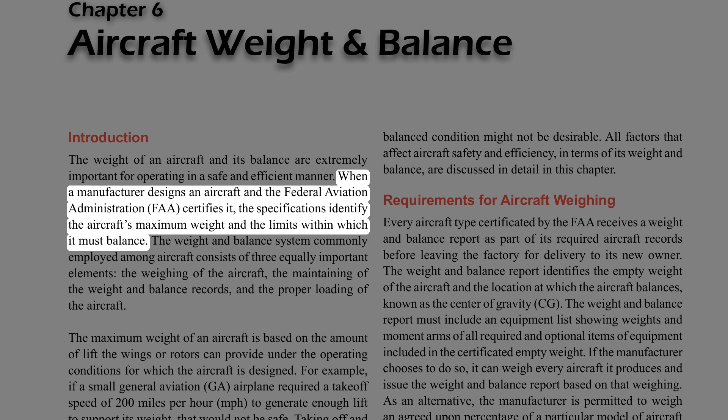The weight and balance system commonly employed among aircraft consists of three equally important elements: the weighing of the aircraft, the maintaining of the weight and balance records, and the proper loading of the aircraft.

The maximum weight of an aircraft is based on the amount of lift the wings or rotors can provide under the operating conditions for which the aircraft is designed. For example, if a small general aviation airplane required a takeoff speed of 200 mph to generate enough lift to support its weight, that would not be safe. Taking off and landing at lower airspeeds is certainly safer than doing so at higher speeds.

Aircraft balance is also a significant factor in determining if the aircraft is safe to operate. An aircraft that does not have good balance can exhibit poor maneuverability and controllability, making it difficult or impossible to fly. This could result in an accident, causing damage to the aircraft and injury to the people on board. Safety is the primary reason for concern about an aircraft's weight and balance.

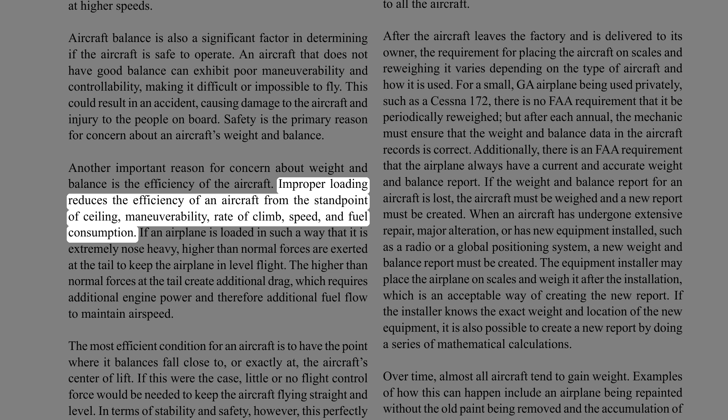Another important reason for concern about weight and balance is the efficiency of the aircraft. Improper loading reduces the efficiency of an aircraft from the standpoint of ceiling, maneuverability, rate of climb, speed, and fuel consumption. If an airplane is loaded in such a way that it is extremely nose-heavy, higher than normal forces are exerted at the tail to keep the airplane in level flight.

The higher than normal forces at the tail create additional drag, which requires additional engine power and therefore additional fuel flow to maintain airspeed. The most efficient condition for an aircraft is to have the point where it balances fall close to, or exactly at, the aircraft's center of lift.

If this were the case, little or no flight control force would be needed to keep the aircraft flying straight and level. In terms of stability and safety, however, this perfectly balanced condition might not be desirable.

All factors that affect aircraft safety and efficiency, in terms of its weight and balance, are discussed in detail in this chapter. Requirements for aircraft weighing.

Every aircraft type certificated by the FAA receives a weight and balance report as part of its required aircraft records before leaving the factory for delivery to its new owner. The weight and balance report identifies the empty weight of the aircraft and the location at which the aircraft balances, known as the center of gravity (CG).

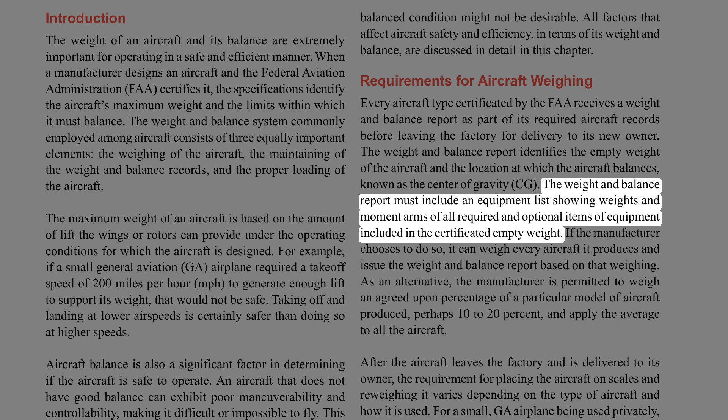The weight and balance report must include an equipment list showing weights and moment arms of all required and optional items of equipment included in the certificated empty weight.

If the manufacturer chooses to do so, it can weigh every aircraft it produces and issue the weight and balance report based on that weighing. As an alternative, the manufacturer is permitted to weigh an agreed-upon percentage of a particular model of aircraft produced, perhaps 10 to 20%, and apply the average to all the aircraft.

After the aircraft leaves the factory and is delivered to its owner, the requirement for placing the aircraft on scales and reweighing it varies depending on the type of aircraft and how it is used.

For a small, GA airplane being used privately, such as a Cessna 172, there is no FAA requirement that it be periodically reweighed. But after each annual, the mechanic must ensure that the weight and balance data in the aircraft records is correct. Additionally, there is an FAA requirement that the airplane always have a current and accurate weight and balance report.

If the weight and balance report for an aircraft is lost, the aircraft must be weighed and a new report must be created.

When an aircraft has undergone extensive repair, major alteration, or has new equipment installed, such as a radio or a global positioning system, a new weight and balance report must be created.

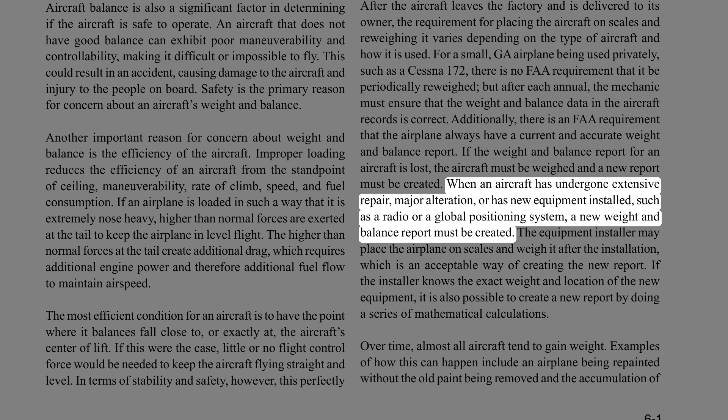The equipment installer may place the airplane on scales and weigh it after the installation, which is an acceptable way of creating the new report.

If the installer knows the exact weight and location of the new equipment, it is also possible to create a new report by doing a series of mathematical calculations.

Over time, almost all aircraft tend to gain weight. Examples of how this can happen include an airplane being repainted without the old paint being removed, and the accumulation of dirt, grease, and oil in parts of the aircraft that are not easily accessible for cleaning.

When new equipment is installed, and its weight and location are mathematically accounted for, some miscellaneous weight might be overlooked, such as wire and hardware. For this reason, even if the FAA does not require it, it is a good practice to periodically place an aircraft on scales and confirm its actual empty weight and empty weight center of gravity, EWCG.

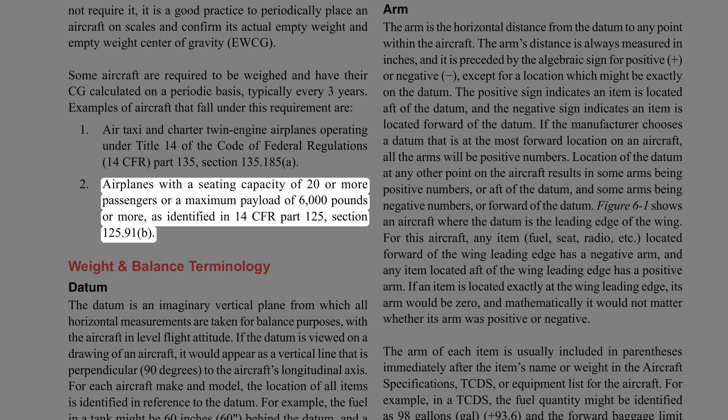Some aircraft are required to be weighed and have their CG calculated on a periodic basis, typically every 3 years. Examples include air taxi and charter twin-engine airplanes operating under Title 14 of the Code of Federal Regulations, 14 CFR, Part 135, Section 135.185(A), airplanes with a seating capacity of 20 or more passengers or a maximum payload of 6,000 pounds or more, as identified in 14 CFR Part 125, Section 125.91(B).

Weight and balance terminology: Datum. The datum is an imaginary vertical plane from which all horizontal measurements are taken for balance purposes, with the aircraft in level flight attitude. If the datum is viewed on a drawing of an aircraft, it would appear as a vertical line that is perpendicular, 90 degrees, to the aircraft's longitudinal axis.

For each aircraft make and model, the location of all items is identified in reference to the datum. For example, the fuel in a tank might be 60 inches behind the datum, and a radio on the flight deck might be 90 inches forward of the datum. The datum is determined by the manufacturer.

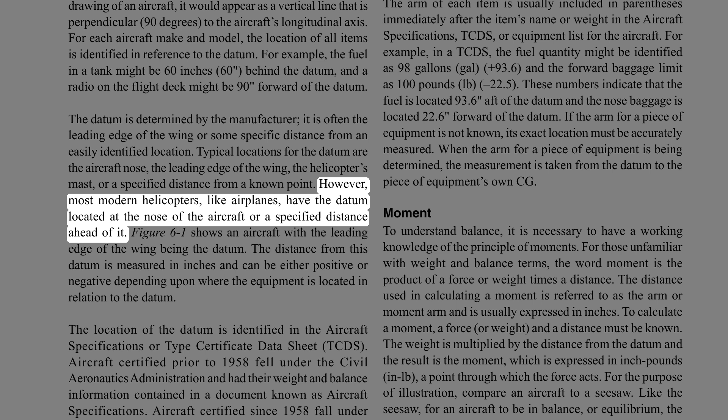It is often the leading edge of the wing or some specific distance from an easily identified location. Typical locations for the datum are the aircraft nose, the leading edge of the wing, the helicopter's mast, or a specified distance from a known point. However, most modern helicopters, like airplanes, have the datum located at the nose of the aircraft or a specified distance ahead of it. Figure 6-1 shows an aircraft with the leading edge of the wing being the datum.

The distance from this datum is measured in inches and can be either positive or negative depending upon where the equipment is located in relation to the datum. The location of the datum is identified in the aircraft specifications or type certificate data sheet, TCDS.

Aircraft certified prior to 1958 fell under the Civil Aeronautics Administration and had their weight and balance information contained in a document known as aircraft specifications. Aircraft certified since 1958 fall under the FAA and have their weight and balance information contained in a document known as a Type Certificate Data Sheet, TCDS. The aircraft specifications typically included the aircraft equipment list. For aircraft with a TCDS, the equipment list is a separate document.

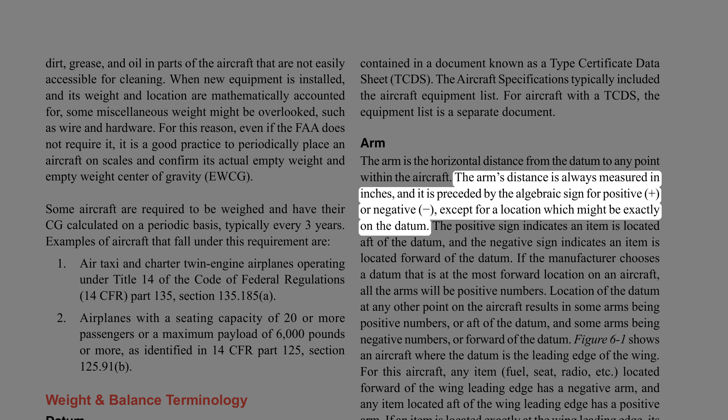ARM. The ARM is the horizontal distance from the datum to any point within the aircraft. The ARM's distance is always measured in inches, and it is preceded by the algebraic sign for positive, plus, or negative, minus, except for a location which might be exactly on the datum. The positive sign indicates an item is located aft of the datum, and the negative sign indicates an item is located forward of the datum.

If the manufacturer chooses a datum that is at the most forward location on an aircraft, all the arms will be positive numbers. Location of the datum at any other point on the aircraft results in some arms being positive numbers, or aft of the datum, and some arms being negative numbers, or forward of the datum.

Figure 6-1 shows an aircraft where the datum is the leading edge of the wing. For this aircraft, any item, fuel, seat, radio, etc., located forward of the wing leading edge has a negative arm, and any item located aft of the wing leading edge has a positive arm. If an item is located exactly at the wing leading edge, its arm would be 0, and mathematically it would not matter whether its arm was positive or negative.

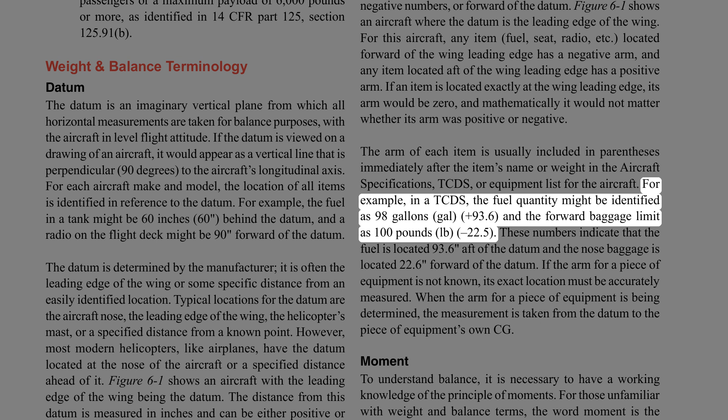The arm of each item is usually included in parentheses immediately after the item's name or weight in the aircraft specifications, TCDS, or equipment list for the aircraft. For example, in a TCDS, the fuel quantity might be identified as 98 gallons plus 93.6, and the forward baggage limit as 100 pounds minus 22.5. These numbers indicate that the fuel is located 93.6 aft of the datum and the nose baggage is located 22.6 forward of the datum. If the arm for a piece of equipment is not known, its exact location must be accurately measured.

When the arm for a piece of equipment is being determined, the measurement is taken from the datum to the piece of equipment's own CG.

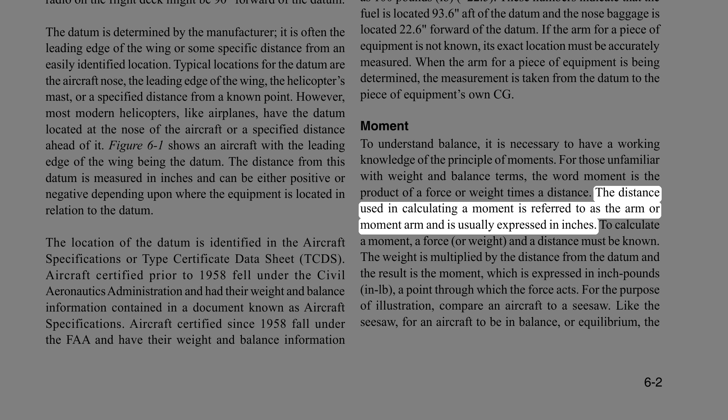Moment. To understand balance, it is necessary to have a working knowledge of the principle of moments. The word moment is the product of a force or weight times a distance. The distance used in calculating a moment is referred to as the arm or moment arm and is usually expressed in inches. To calculate a moment, a force or weight, and a distance must be known. The weight is multiplied by the distance from the datum and the result is the moment, which is expressed in inch-pounds, in lb, a point through which the force acts.

For the purpose of illustration, compare an aircraft to a seesaw. Like the seesaw, for an aircraft to be in balance or equilibrium, the sum of the moments on each side of the balance point must be equal.

The same weight at different distances, in inches, from the datum have greater moments. A 5 pound radio located 80 inches from the datum would have a moment of 400 in lb, 5 pounds times 80 inches. A 10-pound radio located 12 inches from the datum would have a moment of 120 in lb.

Whether the moment is preceded by a positive, plus, or negative, minus, sign depends on its location in relation to the datum. Figure 6-2 shows where the moment ends up being a positive number because the weight and arm are both positive. The algebraic sign of the moment, based on the datum location and whether weight is being installed or removed, would be as follows.

Weight being added aft of the datum produces a positive moment, plus weight, plus arm. Weight being added forward of the datum produces a negative moment, plus weight, minus arm. Weight being removed aft of the datum produces a negative moment, minus weight, plus arm. Weight being removed forward of the datum produces a positive moment, minus weight, minus arm.

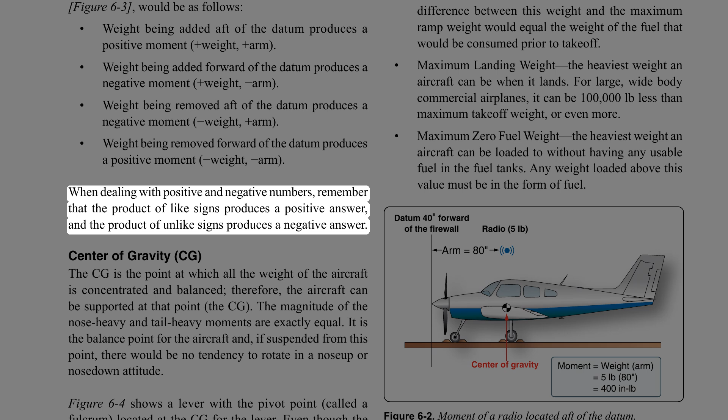When dealing with positive and negative numbers, remember that the product of like signs produces a positive answer, and the product of unlike signs produces a negative answer.

Center of gravity, CG. The CG is the point at which all the weight of the aircraft is concentrated and balanced. Therefore, the aircraft can be supported at that point, the CG. The magnitude of the nose-heavy and tail-heavy moments are exactly equal.

It is the balance point for the aircraft and, if suspended from this point, there would be no tendency to rotate in a nose-up or nose-down attitude.

Figure 6-4 shows a lever with the pivot point, called a fulcrum, located at the CG for the lever. Even though the weights on either side of the fulcrum are not equal, and the distances from each weight to the fulcrum are not equal, the product of the weights and arms, moments, are equal, and that is what produces a balanced condition. Therefore, the lever would be balanced much like two persons sitting on a seesaw who are differing weights and located at different distances from the fulcrum.

Maximum weight. The maximum weight is the maximum authorized weight of the aircraft and its contents, and is indicated in the aircraft specifications or TCDS.

For many aircraft, there are variations to the maximum allowable weight depending on the purpose and conditions under which the aircraft is to be flown. For example, a certain aircraft may be allowed a maximum gross weight of 2,750 pounds when flown in the normal category, but when flown in the utility category, which allows for limited aerobatics, the same aircraft's maximum allowable gross weight might only be 2,175 lb.

There are other variations when dealing with the concept of maximum weight, as follows. Maximum ramp weight, the heaviest weight to which an aircraft can be loaded while it is sitting on the ground. This is sometimes referred to as the maximum taxi weight.

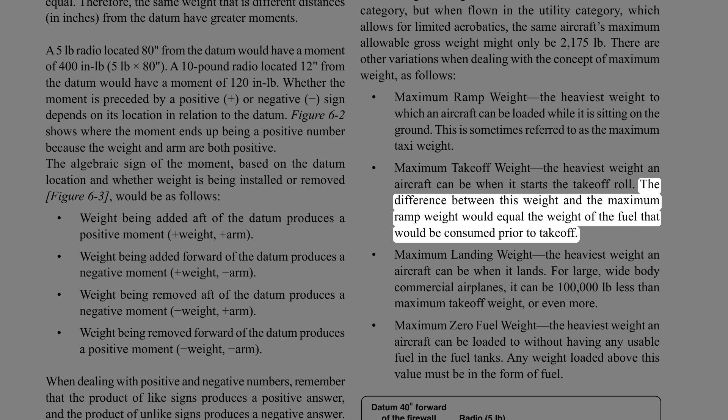Maximum takeoff weight, the heaviest weight an aircraft can be when it starts the takeoff roll. The difference between this weight and the maximum ramp weight would equal the weight of the fuel that would be consumed prior to takeoff. Maximum landing weight, the heaviest weight an aircraft can be when it lands.

For large, wide-body commercial airplanes, it can be 100,000 pounds less than maximum takeoff weight, or even more. Maximum zero fuel weight, the heaviest weight an aircraft can be loaded to without having any usable fuel in the fuel tanks. Any weight loaded above this value must be in the form of fuel.

Empty weight. The empty weight of an aircraft includes all operating equipment that has a fixed location and is actually installed in the aircraft.

It includes the weight of the airframe, power plant, required equipment, optional or special equipment, fixed ballast, hydraulic fluid, and residual fuel and oil. Residual fuel and oil are the fluids that do not normally drain out because they are trapped in the fuel lines, oil lines, and tanks. They must be included in the aircraft's empty weight.

For most aircraft certified after 1978, the full capacity of the engine oil system is also included in the empty weight. Information regarding residual fluids in aircraft systems that must be included in the empty weight, and whether or not full oil is included, will be indicated in the aircraft specifications or TCDS.

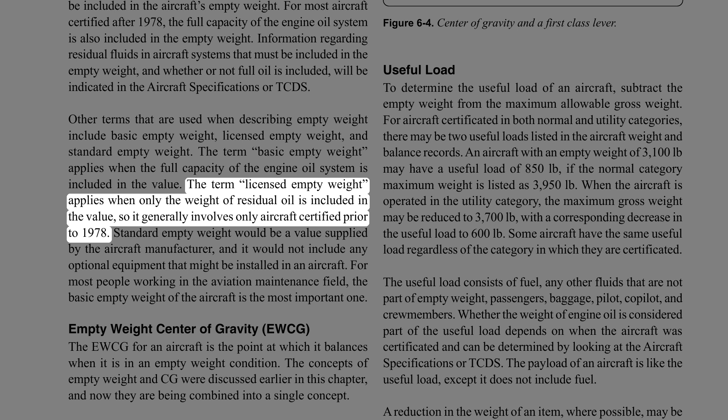Other terms that are used when describing empty weight include basic empty weight, licensed empty weight, and standard empty weight. The term basic empty weight applies when the full capacity of the engine oil system is included in the value. The term licensed empty weight applies when only the weight of residual oil is included in the value, so it generally involves only aircraft certified prior to 1978.

Standard empty weight would be a value supplied by the aircraft manufacturer, and it would not include any optional equipment that might be installed in an aircraft. For most people working in the aviation maintenance field, the basic empty weight of the aircraft is the most important one. Empty weight center of gravity, EWCG.

The EWCG for an aircraft is the point at which it balances when it is in an empty weight condition. The concepts of empty weight and CG were discussed earlier in this chapter, and now they are being combined into a single concept.

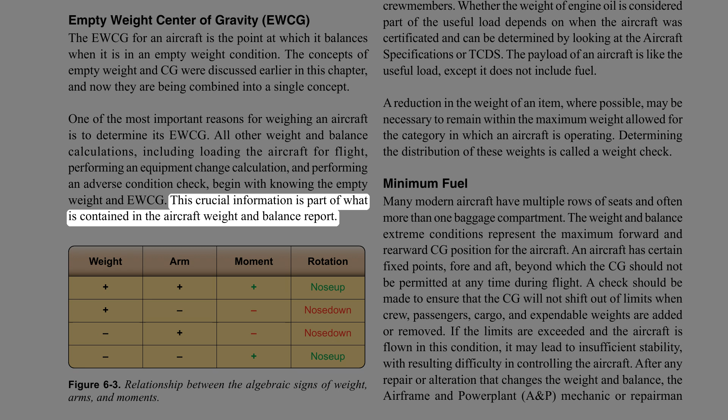One of the most important reasons for weighing an aircraft is to determine its EWCG. All other weight and balance calculations, including loading the aircraft for flight, performing an equipment change calculation, and performing an adverse condition check, begin with knowing the empty weight and EWCG. This crucial information is part of what is contained in the aircraft weight and balance report.

Useful load. To determine the useful load of an aircraft, subtract the empty weight from the maximum allowable gross weight. For aircraft certificated in both normal and utility categories, there may be two useful loads listed in the aircraft weight and balance records. An aircraft with an empty weight of 3,100 pounds may have a useful load of 850 pounds, if the normal category maximum weight is listed as 3,950 lb.

When the aircraft is operated in the utility category, the maximum gross weight may be reduced to 3,700 pounds, with a corresponding decrease in the useful load to 600 lb. Some aircraft have the same useful load regardless of the category in which they are certificated.

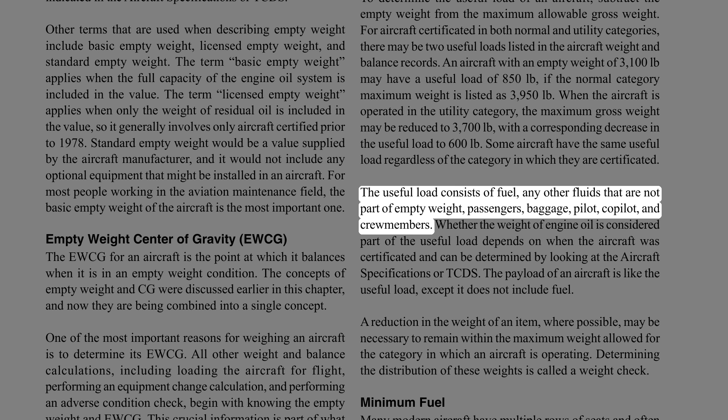The useful load consists of fuel, any other fluids that are not part of empty weight, passengers, baggage, pilot, co-pilot, and crew members. Whether the weight of engine oil is considered part of the useful load depends on when the aircraft was certificated and can be determined by looking at the aircraft specifications or TCDS.

The payload of an aircraft is like the useful load, except it does not include fuel. A reduction in the weight of an item, where possible, may be necessary to remain within the maximum weight allowed for the category in which an aircraft is operating. Determining the distribution of these weights is called a weight check.

Minimum fuel. Many modern aircraft have multiple rows of seats and often more than one baggage compartment. The weight and balance extreme conditions represent the maximum forward and rearward CG position for the aircraft. An aircraft has certain fixed points, fore and aft, beyond which the CG should not be permitted at any time during flight.

A check should be made to ensure that the CG will not shift out of limits when crew, passengers, cargo, and expendable weights are added or removed. If the limits are exceeded and the aircraft is flown in this condition, it may lead to insufficient stability, with resulting difficulty in controlling the aircraft.

After any repair or alteration that changes the weight and balance, the airframe and power plant, A&P, mechanic or repairman, must ensure that no legal condition of loading can move the CG outside of its allowable limits. To determine this, the mechanic will deliberately attempt to calculate the aircraft loading in such a manner as to place the CG outside the limits of the aircraft.

This is called an adverse loading check. For example, in a forward adverse loaded CG check, all useful load in front of the forward CG limit is loaded, and all useful load behind this limit is left empty. An exception to leaving it empty is the fuel tank.

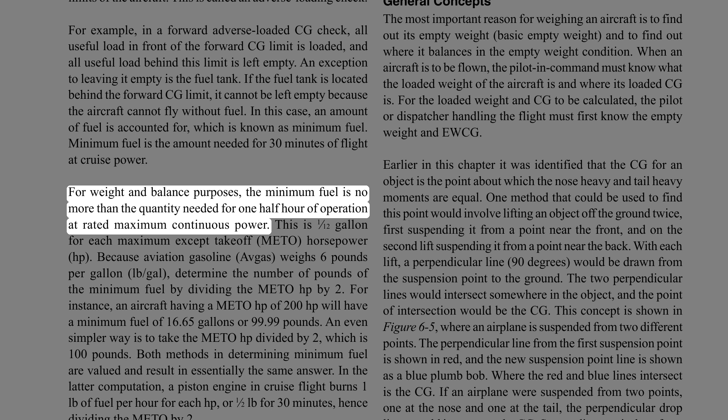Minimum fuel is the amount needed for 30 minutes of flight at cruise power. For weight and balance purposes, the minimum fuel is no more than the quantity needed for 1/2 hour of operation at rated maximum continuous power. This is 1/12 gallon for each maximum except takeoff, METO, horsepower, HP.

Because aviation gasoline, avgas, weighs 6 pounds per gallon, determine the number of pounds of the minimum fuel by dividing the METO HP by 2. For instance, an aircraft having a METO HP of 200 horsepower will have a minimum fuel of 16.65 gallons, or 99.99 pounds. An even simpler way is to take the METO HP divided by 2, which is 100 pounds.

Both methods in determining minimum fuel are valid and result in essentially the same answer. In the latter computation, a piston engine in cruise flight burns 1 pound of fuel per hour for each HP, or half a pound for 30 minutes, hence dividing the METO by 2.

For example, if a forward adverse loaded CG check was performed on a piston engine aircraft, with the engine having a METO HP of 200, the minimum fuel would be 100 pounds, 200 METO HP divided by 2.

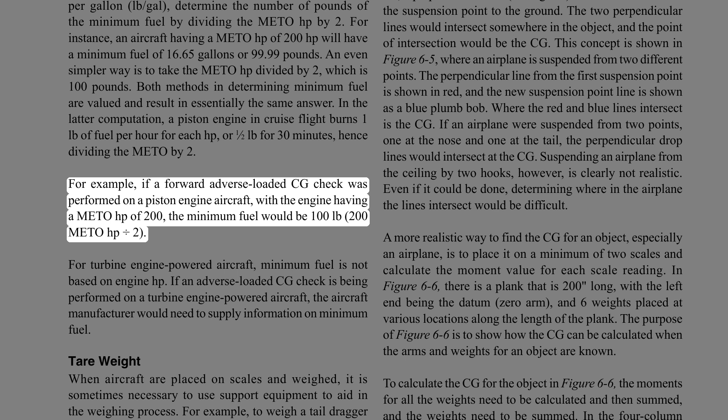For turbine engine powered aircraft, minimum fuel is not based on engine HP. If an adverse loaded CG check is being performed on a turbine engine powered aircraft, the aircraft manufacturer would need to supply information on minimum fuel.

Tare weight: when aircraft are placed on scales and weighed, it is sometimes necessary to use support equipment to aid in the weighing process. For example, to weigh a tail dragger airplane, it is necessary to raise the tail to get the airplane level. To level the airplane, a jack might be placed on the scale and used to raise the tail. Unfortunately, the scale is now absorbing the weight of the jack in addition to the weight of the airplane. This extra weight is known as tare weight and must be subtracted from the scale reading.

Other examples of tare weight are wheel chocks placed on the scales and ground locks left in place on retractable landing gear. Procedures for weighing an aircraft.

General concepts: the most important reason for weighing an aircraft is to find out its empty weight, basic empty weight, and to find out where it balances in the empty weight condition. When an aircraft is to be flown, the pilot in command must know what the loaded weight of the aircraft is and where its loaded CG is.

For the loaded weight and CG to be calculated, the pilot or dispatcher handling the flight must first know the empty weight and EWCG. Earlier in this chapter it was identified that the CG for an object is the point about which the nose-heavy and tail-heavy moments are equal.

One method that could be used to find this point would involve lifting an object off the ground twice, first suspending it from a point near the front, and on the second lift suspending it from a point near the back. With each lift, a perpendicular line, 90 degrees, would be drawn from the suspension point to the ground. The two perpendicular lines would intersect somewhere in the object, and the point of intersection would be the CG.

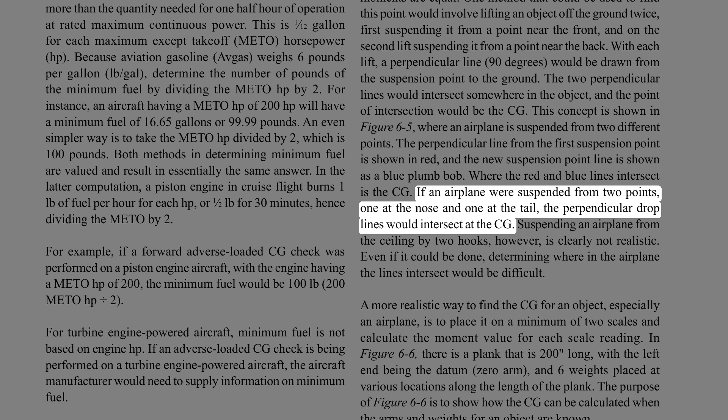This concept is shown in Figure 6-5, where an airplane is suspended from two different points. The perpendicular line from the first suspension point is shown in red, and the new suspension point line is shown as a blue plumb bob. Where the red and blue lines intersect is the CG. If an airplane were suspended from 2 points, one at the nose and one at the tail, the perpendicular drop lines would intersect at the CG.

Suspending an airplane from the ceiling by 2 hooks, however, is clearly not realistic. Even if it could be done, determining where in the airplane the lines intersect would be difficult. A more realistic way to find the CG for an object, especially an airplane, is to place it on a minimum of 2 scales and calculate the moment value for each scale reading.

In Figure 6-6, there is a plank that is 200 inches long, with the left end being the datum, 0 arm, and 6 weights placed at various locations along the length of the plank. The purpose of Figure 6-6 is to show how the CG can be calculated when the arms and weights for an object are known.

To calculate the CG for the object in Figure 6-6, the moments for all the weights need to be calculated and then summed, and the weights need to be summed. In the 4-column table in Figure 6-7, the item, weight, and arm are listed in the first 3 columns, with the information coming from Figure 6-6.

The moment value in the 4th column is the product of the weight and arm. The weight and moment columns are summed, with the CG being equal to the total moment divided by the total weight. The arm column is not summed. The number appearing at the bottom of that column is the CG.

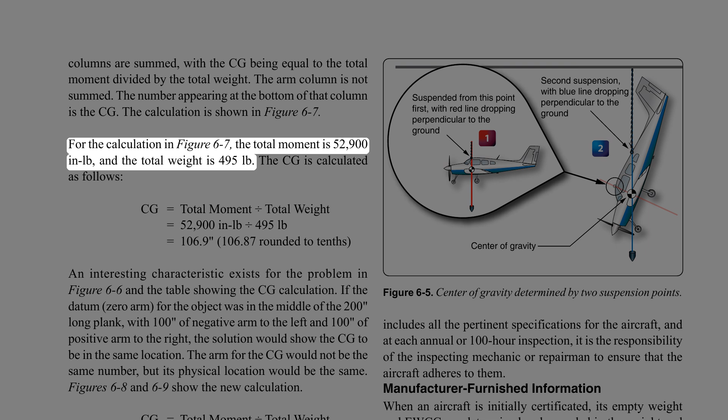The calculation is shown in Figure 6-7. For the calculation in Figure 6-7, the total moment is 52,900 in-lb, and the total weight is 495 lb. The CG is calculated as follows: CG equals total moment divided by total weight equals 52,900 in-lb divided by 495 pounds equals 106.9 inches, 106.87 rounded to tenths.

An interesting characteristic exists for the problem in Figure 6-6 in the table showing the CG calculation. If the datum, 0 arm, for the object was in the middle of the 200 inches long plank, with 100 inches of negative arm to the left and 100 inches of positive arm to the right, the solution would show the CG to be in the same location. The arm for the CG would not be the same number, but its physical location would be the same.

Figures 6-8 and 6-9 show the new calculation. CG equals total moment divided by total weight equals 3,400 in-lb divided by 495 pounds equals 6.9 inches, 6.87 rounded to tenths. In Figure 6-8, the CG is 6.9, to the right of the plank's center.

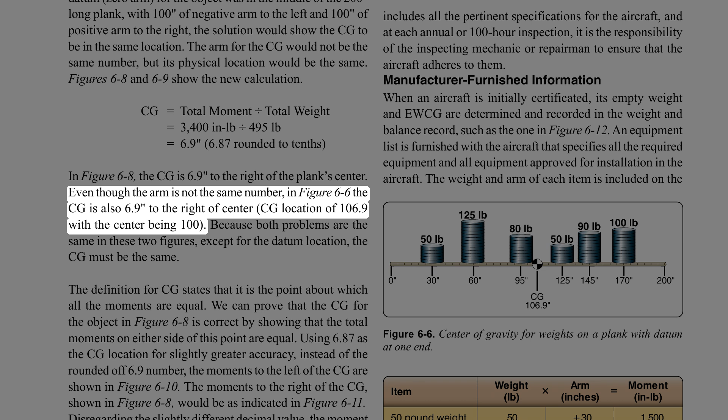Even though the arm is not the same number, in Figure 6-6 the CG is also 6.9, to the right of center, CG location of 106.9 with the center being 100. Because both problems are the same in these two figures, except for the datum location, the CG must be the same. The definition for CG states that it is the point about which all the moments are equal.

We can prove that the CG for the object in Figure 6-8 is correct by showing that the total moments on either side of this point are equal. Using 6.87 as the CG location for slightly greater accuracy, instead of the rounded off 6.9 number, the moments to the left of the CG are shown in Figure 6-10. The moments to the right of the CG, shown in Figure 6-8, would be as indicated in Figure 6-11. Disregarding the slightly different decimal value, the moment in both previous calculations is 10,651 in-lb.

Showing that the moments are equal is a good way of proving that the CG has been properly calculated.

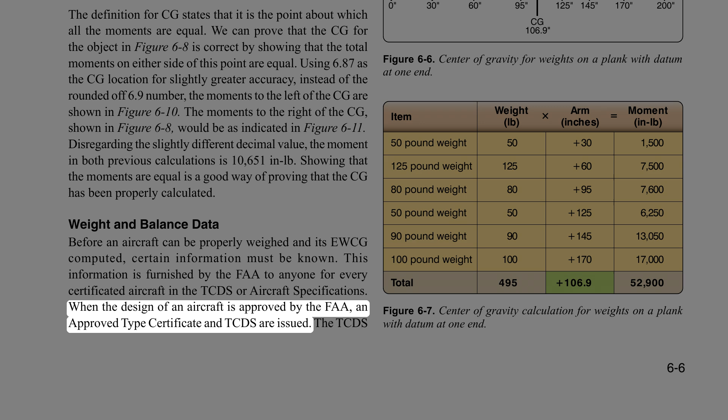Weight and balance data. Before an aircraft can be properly weighed and its EWCG computed, certain information must be known. This information is furnished by the FAA to anyone for every certificated aircraft in the TCDS, or aircraft specifications. When the design of an aircraft is approved by the FAA, an approved type certificate and TCDS are issued. The TCDS includes all the pertinent specifications for the aircraft, and at each annual or 100-hour inspection, it is the responsibility of the inspecting mechanic or repairman to ensure that the aircraft adheres to them.

Manufacturer-Furnished Information. When an aircraft is initially certificated, its empty weight and EWCG are determined and recorded in the weight and balance record, such as the one in Figure 6-12. An equipment list is furnished with the aircraft that specifies all the required equipment and all equipment approved for installation in the aircraft. The weight and arm of each item is included on the list, and all equipment installed when the aircraft left the factory is checked.

When an aircraft mechanic or repairman adds or removes any item on the equipment list, they must change the weight and balance record to indicate the new empty weight and EWCG, and the equipment list is revised to show what is installed. Figure 6-13 is an excerpt from a comprehensive equipment list that includes all the items of equipment approved for this model of aircraft.

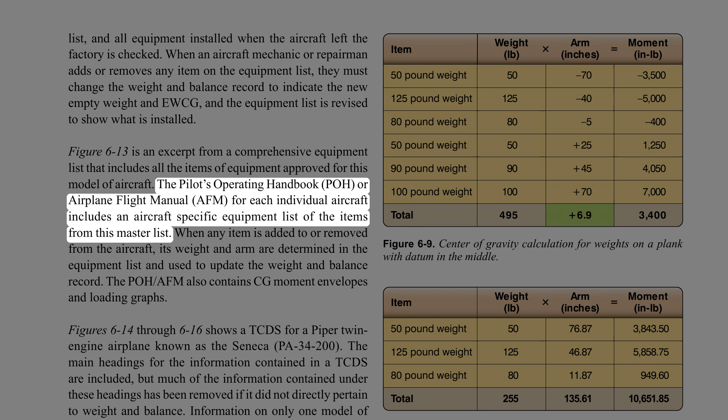The Pilot's Operating Handbook, POH, or Airplane Flight Manual, AFM, for each individual aircraft includes an aircraft-specific equipment list of the items from this master list. When any item is added to or removed from the aircraft, its weight and arm are determined in the equipment list and used to update the weight and balance record.

The POH/AFM also contains CG moment envelopes and loading graphs. Figures 6 to 14 through 6 to 16 show a TCDS for a Piper twin-engine airplane known as the Seneca.

PA-34-200. The main headings for the information contained in a TCDS are included, but much of the information under these headings has been removed if it did not directly pertain to weight and balance. Information on only one model of Seneca is shown, because showing all the different models would make the document excessively long. The portion of the TCDS that has the most direct application to weight and balance is highlighted in yellow.

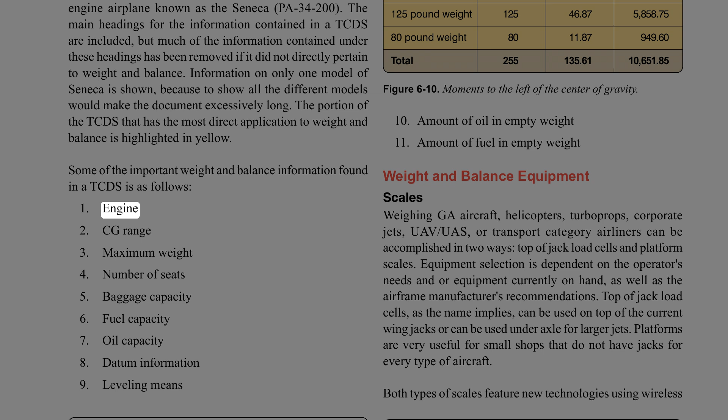Amount of oil in empty weight, amount of fuel in empty weight, weight and balance equipment, scales, weighing GA aircraft.

Helicopters, turboprops, corporate jets, UAV, UAS, or transport category airliners can be weighed in two ways: top of jack load cells and platform scales. Equipment selection depends on the operator's needs and/or equipment currently on hand, as well as the airframe manufacturer's recommendations. Top of jack load cells, as the name implies, can be used on top of the current wing jacks or under the axle for larger jets.

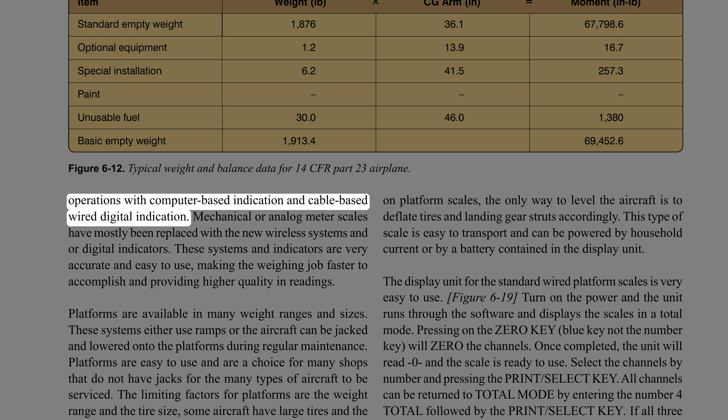Platforms are very useful for small shops that do not have jacks for every type of aircraft. Both types of scales feature new technologies using wireless operations with computer-based indication and cable-based wired digital indication. Mechanical or analog meter scales have mostly been replaced with new wireless systems and/or digital indicators.

These systems and indicators are very accurate and easy to use, making the weighing job faster to accomplish and providing higher quality readings. Platforms are available in many weight ranges and sizes. These systems either use ramps or the aircraft can be jacked and lowered onto the platforms during regular maintenance.

Platforms are easy to use and are a choice for many shops that do not have jacks for the many types of aircraft to be serviced. The limiting factors for platforms are the weight range and the tire size. Some aircraft have large tires and the platform may be too small for the specific aircraft tire. It is important to always use the right size scale and platform for the aircraft type and weighing job required.

The platform scale sits on the hangar floor in a level condition. Ramps and a tug are used to position the airplane tire on top of the platform and centered. Built into the platform is an electronic load cell that senses the weight being applied to it, which generates a corresponding electrical signal. Inside the load cell is an electronic strain gauge that measures a proportional change in electrical resistance as the weight applied to it increases.

An electrical cable or wireless signal runs from the platform scale to a display unit, computer, or tablet, which interprets the resistance change of the load cell and equates it to a specific number of pounds. A digital readout on the display shows the weight.

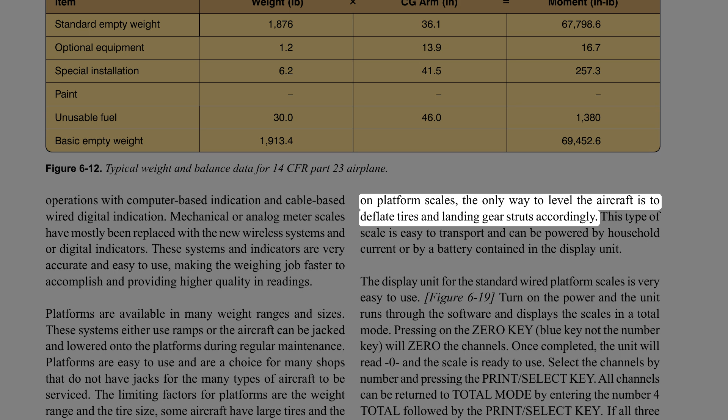If an aircraft is weighed on platform scales, the only way to level the aircraft is to deflate tires and landing gear struts accordingly. This type of scale is easy to transport and can be powered by household current or by a battery contained in the display unit.

The display unit for the standard wired platform scales is very easy to use. Turn on the power and the unit runs through the software and displays the scales in total mode. Pressing the ZERO key, the blue key not the number key, will zero the channels. Once completed, the unit will read zero and the scale is ready to use.

Select the channels by number and press the Print/Select key. All channels can be returned to total mode by entering the number 4 for total, followed by the Print/Select key. If all 3 scale switches are turned on at the same time, the total weight of the airplane is displayed.

The second type of aircraft scale is a top-of-jack, cell-based scale, where each jack point receives a cell-based transducer on top of the jack. It is very easy to use and level the aircraft during the weighing operation.

The system is easy to transport, lightweight, and simple to set up. The operator must have a jack capable of receiving and mounting the cell. Cells come in many weight ranges, dependent on the weight required per point to accomplish the weighing and receiving the actual jack point type.

The top of the load cell has a concave shape that matches up with the jack pad on the aircraft, with the load cell absorbing all the weight of the aircraft at each jacking point. Each load cell either has an electrical cable attached to it or is wireless, which connects to the display unit or computer readout that shows the weight transmitted to each load cell.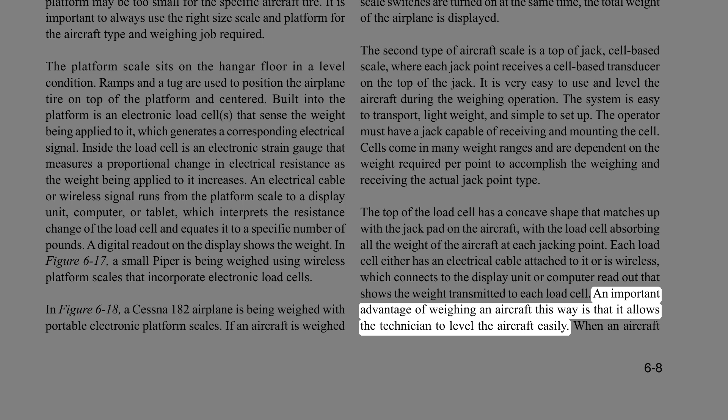An important advantage of weighing an aircraft this way is that it allows the technician to level the aircraft easily.

The aircraft is weighed using load cells on jacks. Leveling the aircraft is done by adjusting the height with the jacks and checking the level at the level point. Figure 6 to 20 shows a Gulfstream jet on jacks with the load cells in place. Always follow the aircraft manufacturer's weighing and leveling procedures and processes.

All aircraft need to be in a flight level attitude when they are weighed, unless the manufacturer's manual specifically allows it or has a formula in the manual to use accordingly.

Spirit level: before an aircraft can be weighed and reliable readings obtained, it must be in a level flight attitude. One method to check for a level condition is to use a spirit level, sometimes thought of as a carpenter's level, by placing it on or against a specified place on the aircraft. Spirit levels consist of a vial full of liquid, except for a small air bubble. When the air bubble is centered between the two black lines, a level condition is indicated.

In Figure 6 to 21, a spirit level is being used on a Mooney M20 to check for a flight level attitude. By looking in the TCDS, it is determined that the leveling means is two screws on the left side of the airplane fuselage, in line with the trailing edge of the wing.

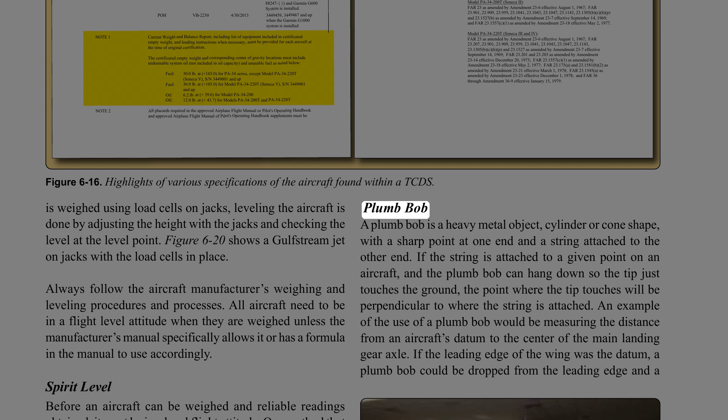Plumb bob: a plumb bob is a heavy metal object, cylinder or cone shaped, with a sharp point at one end and a string attached to the other end.

If the string is attached to a given point on an aircraft and the plumb bob hangs down so the tip just touches the ground, the point where the tip touches will be perpendicular to where the string is attached. An example of the use of a plumb bob would be measuring the distance from an aircraft's datum to the center of the main landing gear axle.

If the leading edge of the wing was the datum, a plumb bob could be dropped from the leading edge and a chalk mark made on the hangar floor. The plumb bob could also be dropped from the center of the axle on the main landing gear, and a chalk mark made on the floor. With a tape measure, the distance between the two chalk marks could be determined, and the arm for the main landing gear would be known.

Plumb bobs can also be used to level an aircraft, as described in the helicopter weight and balance section of this chapter. Figure 6 to 22 shows a plumb bob being dropped from the leading edge of an aircraft wing.

Hydrometer: when an aircraft is weighed with full fuel in the tanks, the weight of the fuel must be accounted for by mathematically subtracting it from the scale readings. To subtract it, its weight, arm, and moment must be known.

Although the standard weight for aviation gasoline (avgas) is 6.0 pounds per gallon and jet fuel is 6.7 pounds per gallon, these values are not exact for all conditions. On a hot day versus a cold day, these values can vary dramatically. On a hot summer day in Florida, avgas checked with a hydrometer typically weighs between 5.85 and 5.9 pounds per gallon. If 100 gallons of fuel were involved in a calculation, using the actual weight versus the standard weight would make a difference of 10 to 15 pounds.

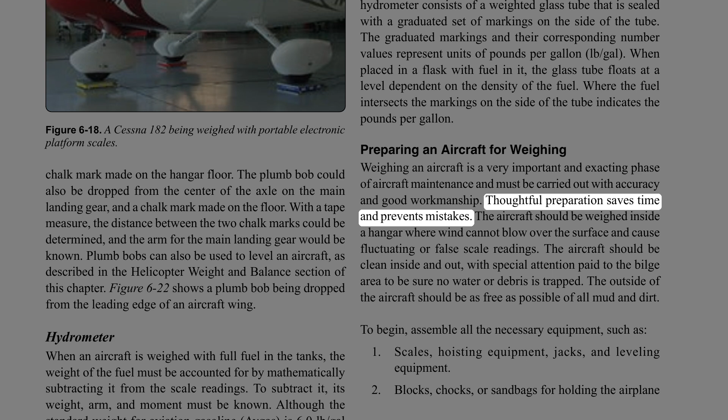Preparing an aircraft for weighing. Weighing an aircraft is a very important and exacting phase of aircraft maintenance and must be carried out with accuracy and good workmanship. Thoughtful preparation saves time and prevents mistakes.

The aircraft should be weighed inside a hangar where wind cannot blow over the surface and cause fluctuating or false scale readings. The aircraft should be clean inside and out, with special attention paid to the bilge area to be sure no water or debris is trapped. The outside of the aircraft should be as free as possible of all mud and dirt.

To begin, assemble all the necessary equipment, such as scales, hoisting equipment, jacks, and leveling equipment, blocks, chocks, or sandbags for holding the airplane on the scales, straight edge, spirit level, plumb bobs, chalk line, and a measuring tape, along with applicable aircraft specifications and weight and balance computation forms.

Fuel system. When weighing an aircraft to determine its empty weight, only the weight of residual, unusable fuel should be included. To ensure that only residual fuel is accounted for, the aircraft should be weighed in one of the following three conditions. Weigh the aircraft with absolutely no fuel in the aircraft tanks or fuel lines.

If an aircraft is weighed in this condition, the technician can mathematically add the proper amount of residual fuel to the aircraft and account for its arm and moment. The proper amount of fuel can be determined by looking in the aircraft's TCDS.

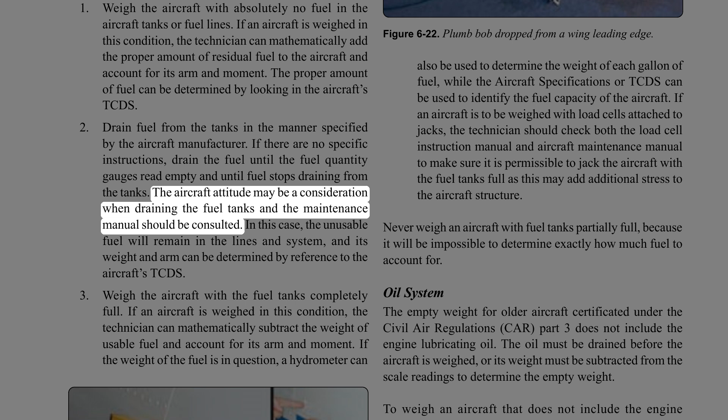Drain fuel from the tanks in the manner specified by the aircraft manufacturer. If there are no specific instructions, drain the fuel until the fuel quantity gauges read empty and until fuel stops draining from the tanks. The aircraft attitude may be a consideration when draining the fuel tanks, and the maintenance manual should be consulted. In this case, the unusable fuel will remain in the lines and system, and its weight and arm can be determined by reference to the aircraft's TCDS.

Weigh the aircraft with the fuel tanks completely full. If an aircraft is weighed in this condition, the technician can mathematically subtract the weight of usable fuel and account for its arm and moment.

If the weight of the fuel is in question, a hydrometer can also be used to determine the weight of each gallon of fuel, while the aircraft specifications or TCDS can be used to identify the fuel capacity of the aircraft.

If an aircraft is to be weighed with load cells attached to jacks, the technician should check both the load cell instruction manual and aircraft maintenance manual to make sure it is permissible to jack the aircraft with the fuel tanks full, as this may add additional stress to the aircraft structure.

Never weigh an aircraft with fuel tanks partially full, because it will be impossible to determine exactly how much fuel to account for. Oil system.

The empty weight for older aircraft certificated under the Civil Air Regulations, CAR, Part 3, does not include the engine lubricating oil. The oil must be drained before the aircraft is weighed, or its weight must be subtracted from the scale readings to determine the empty weight.

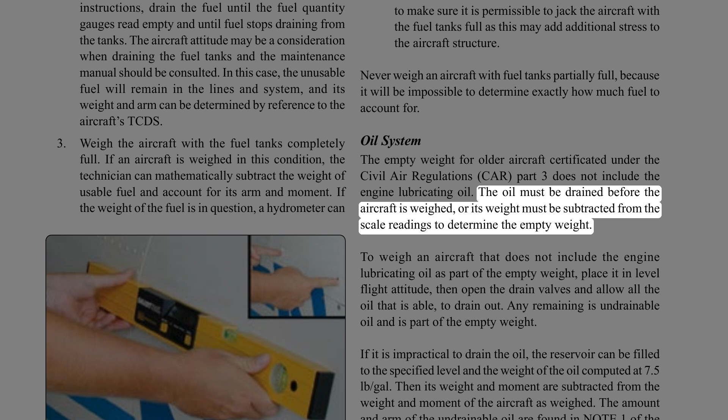To weigh an aircraft that does not include the engine lubricating oil as part of the empty weight, place it in level flight attitude, then open the drain valves and allow all the oil that is able to drain out. Any remaining is undrainable oil and is part of the empty weight.

If it is impractical to drain the oil, the reservoir can be filled to the specified level and the weight of the oil computed at 7.5 pounds per gallon. Then its weight and moment are subtracted from the weight and moment of the aircraft as weighed. The amount and arm of the undrainable oil are found in Note 1 of the TCDS, and this must be added to the empty weight.

For aircraft certificated since 1978 under 14 CFR Parts 23 and 25, full engine oil is typically included in an aircraft's empty weight. This can be confirmed by looking at the TCDS. If full oil is to be included, the oil level needs to be checked and the oil system serviced if it is less than full.

Miscellaneous fluids. The hydraulic fluid reservoir and all other reservoirs containing fluids required for normal operation of the aircraft should be full. Fluids not considered part of the empty weight of the aircraft are potable drinkable water, lavatory pre-charge water, and water for injection into the engines.

Flight controls. The position of items such as spoilers, slats, flaps, and helicopter rotor systems is an important factor when weighing an aircraft. Always refer to the manufacturer's instructions for the proper position of these items.

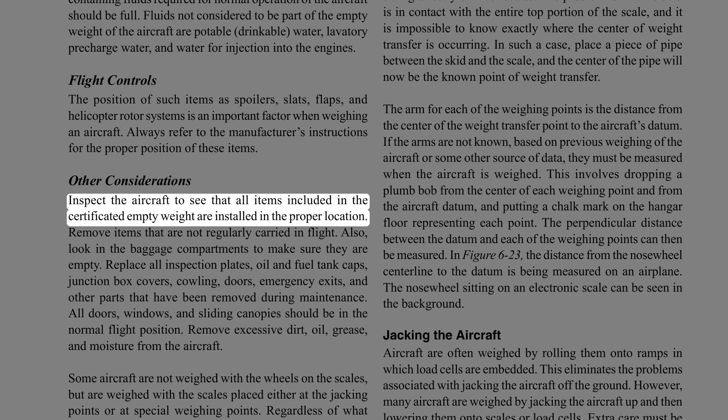Other considerations. Inspect the aircraft to see that all items included in the certificated empty weight are installed in the proper location. Remove items that are not regularly carried in flight. Also look in the baggage compartments to make sure they are empty. Replace all inspection plates, oil and fuel tank caps, junction box covers, cowling, doors, emergency exits, and other parts that have been removed during maintenance.

All doors, windows, and sliding canopies should be in the normal flight position. Remove excessive dirt, oil, grease, and moisture from the aircraft.

Some aircraft are not weighed with the wheels on the scales, but are weighed with the scales placed either at the jacking points or at special weighing points. Regardless of what provisions are made for placing the aircraft on the scales or jacks, be careful to prevent it from falling or rolling off, thereby damaging the aircraft and equipment. When weighing an aircraft with the wheels placed on the scales, release the brakes to reduce the possibility of incorrect readings caused by side loads on the scales.

All aircraft have leveling points or lugs, and care must be taken to level the aircraft, especially along the longitudinal axis. With light, fixed-wing airplanes, the lateral level is not as critical as it is with heavier airplanes. However, a reasonable effort should be made to level light airplanes along the lateral axis. Helicopters must be level longitudinally and laterally when they are weighed. Accuracy in leveling all aircraft longitudinally cannot be overemphasized.

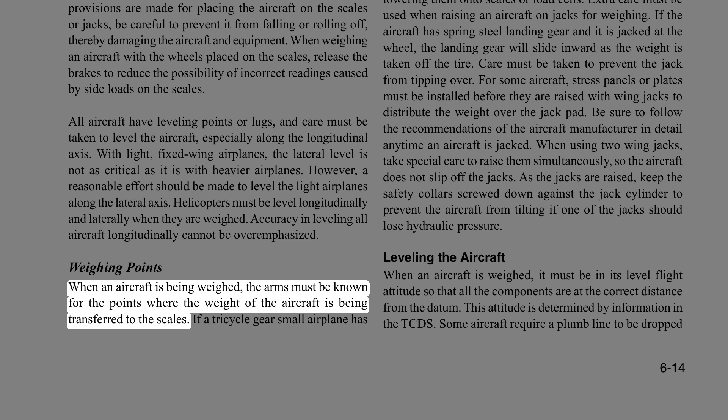Weighing points. When an aircraft is being weighed, the arms must be known for the points where the weight of the aircraft is being transferred to the scales. If a tricycle gear small airplane has its three wheels sitting on floor scales, the weight transfer to each scale happens through the center of the axle for each wheel. If an airplane is weighed while on jacks, the weight transfer happens through the center of the jack pad.

For a helicopter with skids for landing gear, determining the arm for the weighing points can be difficult if the skids are sitting directly on floor scales. The problem is that the skid is in contact with the entire top portion of the scale, and it is impossible to know exactly where the center of weight transfer is occurring. In such a case, place a piece of pipe between the skid and the scale, and the center of the pipe will now be the known point of weight transfer.

The arm for each of the weighing points is the distance from the center of the weight transfer point to the aircraft's datum. If the arms are not known, based on previous weighing of the aircraft or some other source of data, they must be measured when the aircraft is weighed. This involves dropping a plumb bob from the center of each weighing point and from the aircraft datum, and putting a chalk mark on the hangar floor representing each point. The perpendicular distance between the datum and each of the weighing points can then be measured.

In Figure 6-23, the distance from the nosewheel centerline to the datum is being measured on an airplane. The nosewheel sitting on an electronic scale can be seen in the background.

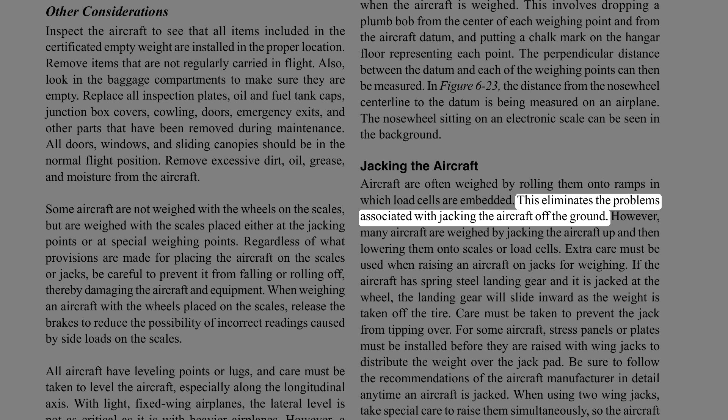Jacking the aircraft. Aircraft are often weighed by rolling them onto ramps in which load cells are embedded. This eliminates the problems associated with jacking the aircraft off the ground. However, many aircraft are weighed by jacking the aircraft up and then lowering them onto scales or load cells.

Extra care must be used when raising an aircraft on jacks for weighing. If the aircraft has spring steel landing gear and it is jacked at the wheel, the landing gear will slide inward as the weight is taken off the tire. Care must be taken to prevent the jack from tipping over. For some aircraft, stress panels or plates must be installed before they are raised with wing jacks to distribute the weight over the jack pad. Be sure to follow the recommendations of the aircraft manufacturer in detail anytime an aircraft is jacked.

When using 2 wing jacks, take special care to raise them simultaneously so the aircraft does not slip off the jacks. As the jacks are raised, keep the safety collars screwed down against the jack cylinder to prevent the aircraft from tilting if one of the jacks should lose hydraulic pressure.

Leveling the aircraft: when an aircraft is weighed, it must be in its level flight attitude so that all the components are at the correct distance from the datum. This attitude is determined by information in the TCDS.

Some aircraft require a plumb line to be dropped from a specified location so that the point of the weight, the bob, hangs directly above an identifiable point. Others specify that a spirit level be placed across 2 leveling lugs, special screws on the outside of the fuselage. Other aircraft call for a spirit level to be placed on the upper door sill.

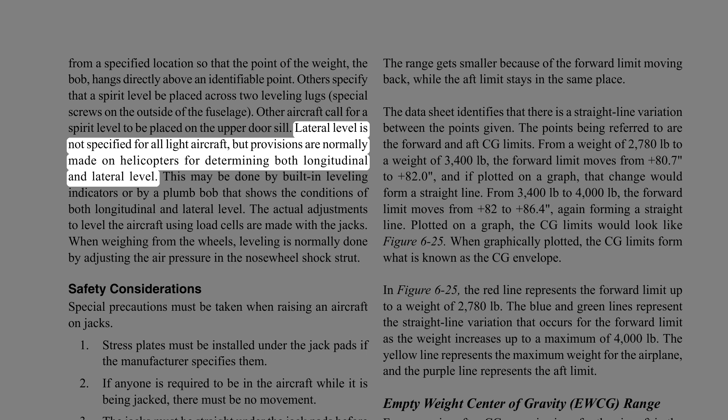Lateral level is not specified for all light aircraft, but provisions are normally made on helicopters for determining both longitudinal and lateral level. This may be done by built-in leveling indicators or by a plumb bob that shows the conditions of both longitudinal and lateral level.

The actual adjustments to level the aircraft using load cells are made with the jacks. When weighing from the wheels, leveling is normally done by adjusting the air pressure in the nosewheel shock strut.

Safety considerations: special precautions must be taken when raising an aircraft on jacks. Stress plates must be installed under the jack pads if the manufacturer specifies them. If anyone is required to be in the aircraft while it is being jacked, there must be no movement. The jacks must be straight under the jack pads before beginning to raise the aircraft.

All jacks must be raised simultaneously and safety devices placed against the jack cylinder to prevent the aircraft from tipping if any jack should lose pressure. Not all jacks have screw-down collars; some use drop pins or friction locks.

CG range: the CG range for an aircraft is the limits within which the aircraft must balance. It is identified as a range and considered an arm extending from the forward-most limit to the aft-most limit, usually expressed in inches. In the TCDS for the Piper Seneca airplane, shown earlier in this chapter, the range is given in figure 6-24. Because the Piper Seneca is a retractable gear airplane, the specifications identify that the range applies when the landing gear is extended, and that the airplane's total moment is decreased by 32 when the gear retracts.

To know how much the CG changes when the gear is retracted, the moment of 32 in-lb would need to be divided by the loaded weight of the airplane. For example, if the airplane weighed 3,500 pounds, the CG would move forward 0.009 inches, 32 divided by 3,500.

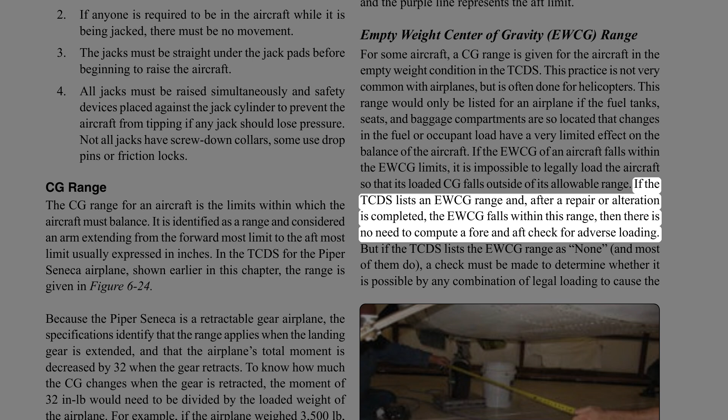If the EWCG of an aircraft falls within the EWCG limits, it is impossible to legally load the aircraft so that its loaded CG falls outside of its allowable range. If the TCDS lists an EWCG range and, after a repair or alteration is completed, the EWCG falls within this range, then there is no need to compute a fore and aft check for adverse loading. But if the TCDS lists the EWCG range as none, and most of them do, a check must be made to determine whether it is possible by any combination of legal loading to cause the aircraft CG to move outside of either its forward or aft limits.

Operating CG range. All aircraft have CG limits identified for the operational condition, with the aircraft loaded and ready for flight. If an aircraft can operate in more than one category, such as normal and utility, more than one set of limits might be listed. As shown earlier for the Piper Seneca airplane, the limits can change as the weight of the aircraft increases. To legally fly, the CG for the aircraft must fall within the CG limits.

Standard weights used for aircraft weight and balance. Unless the specific weight for an item is known, the standard weights used in aircraft weight and balance are as follows: Avgas, 6 pounds per gallon. Turbine fuel, 6.7 pounds per gallon. Lubricating oil, 7.5 pounds per gallon. Water, 8.35 pounds per gallon. Crew and passengers, 170 pounds per person.

Example weighing of an airplane. In Figure 6-26, a tricycle gear airplane is being weighed by using 3 floor scales. The specifications on the airplane and the weighing specific data are shown in Figure 6-27. By analyzing the data identified for the airplane being weighed in Figure 6-26, the following information is determined.

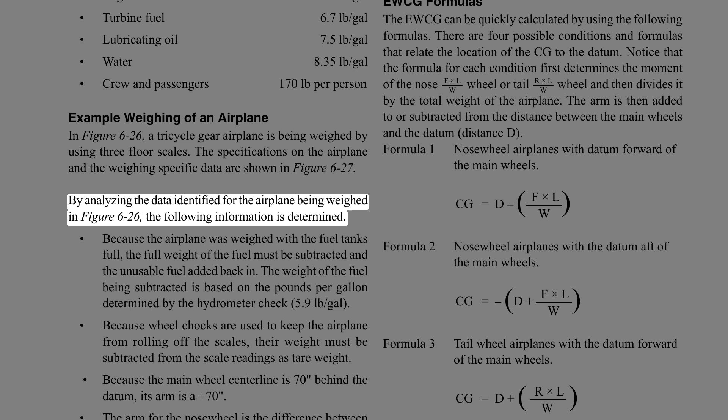Because the airplane was weighed with the fuel tanks full, the full weight of the fuel must be subtracted and the unusable fuel added back in. The weight of the fuel being subtracted is based on the pounds per gallon determined by the hydrometer check, 5.9 pounds per gallon. Because wheel chocks are used to keep the airplane from rolling off the scales, their weight must be subtracted from the scale readings as tare weight.

Because the main wheel centerline is 70 inches behind the datum, its arm is a plus 70. The arm for the nosewheel is the difference between the wheelbase, 100, and the distance from the datum to the main wheel centerline, 70. Therefore, the arm for the nosewheel is minus 30.

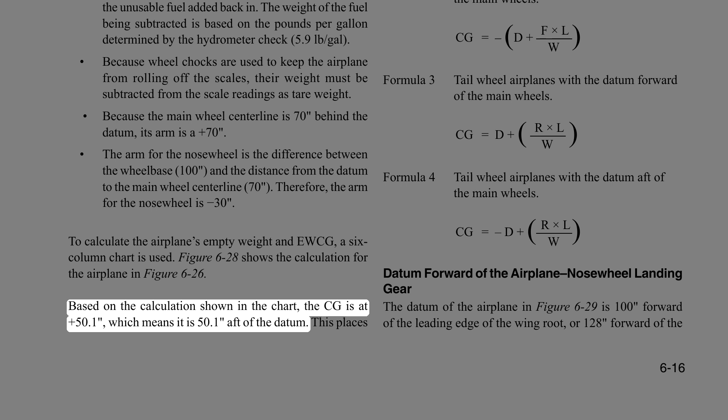To calculate the airplane's empty weight and EWCG, a 6-column chart is used. Figure 6-28 shows the calculation for the airplane in Figure 6-26. Based on the calculation shown in the chart, the CG is at plus 50.1, which means it is 50.1 aft of the datum. This places the CG forward of the main landing gear, which must be the case for a tricycle gear airplane. This number is the result of dividing the total moment of 66,698 in-lb by the total weight of 1,331.5 lb.

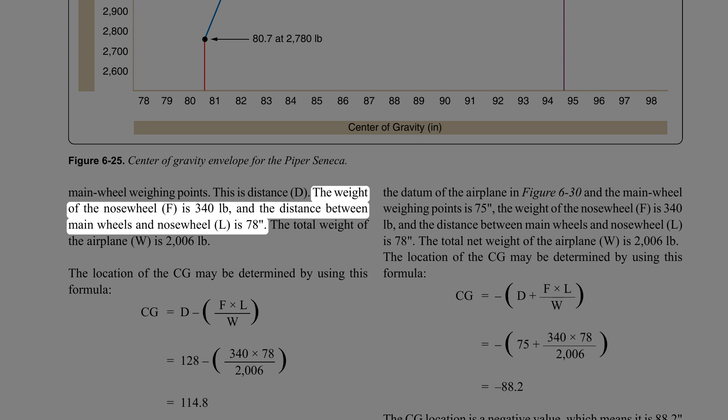F times L, over W. Datum forward of the airplane nosewheel landing gear. The datum of the airplane in Figure 6-29 is 100 forward of the leading edge of the wing root, or 128 forward of the main wheel weighing points. This is distance D. The weight of the nosewheel, F, is 340 pounds, and the distance between main wheels and nosewheel, L, is 78. The total weight of the airplane, W, is 2006 lb.

The location of the CG may be determined by using this formula. The CG is 114.8 aft of the datum. This is 13.2 forward of the main wheel weighing points, which proves the location of the datum has no effect on the location of the CG so long as all measurements are made from the same location.

Datum aft of the main wheel's nosewheel landing gear. The datum of some aircraft may be located aft of the main wheels. The airplane in this example is the same one just discussed, but the datum is at the intersection of the trailing edge of the wing with the fuselage.

The distance, D, between the datum of the airplane in Figure 6-30 and the main wheel weighing points is 75 inches, the weight of the nosewheel, F, is 340 pounds, and the distance between main wheels and nosewheel, L, is 78. The total net weight of the airplane, W, is 2,006 lb.

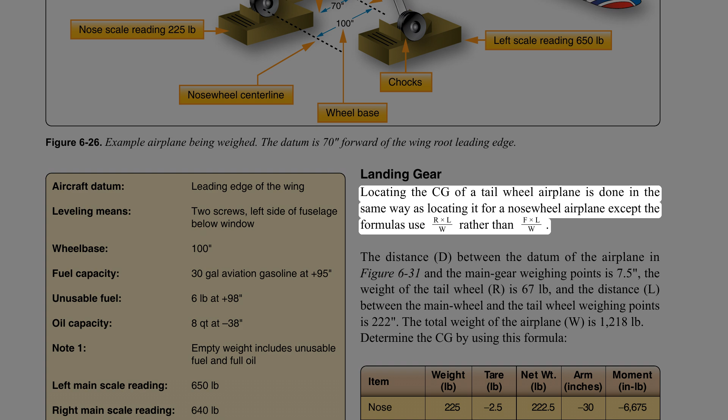Landing gear. Locating the CG of a tailwheel airplane is done in the same way as locating it for a nosewheel airplane, except the formulas use R times L over W rather than F times L over W.

The distance, D, between the datum of the airplane in Figure 6-31 and the main gear weighing points is 7.5. The weight of the tailwheel, R, is 67 pounds, and the distance, L, between the main wheel and the tailwheel weighing points is 222. The total weight of the airplane, W, is 1,218 lb.

Determine the CG by using this formula. Datum aft of the main wheel's tailwheel landing gear.

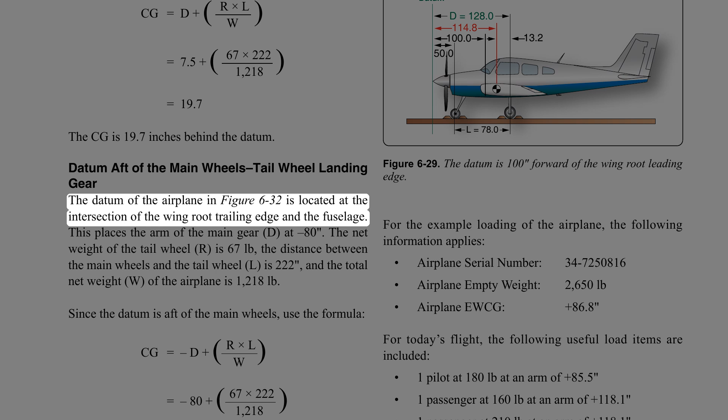The datum of the airplane in Figure 6-32 is located at the intersection of the wing root trailing edge and the fuselage. This places the arm of the main gear, D, at minus 80. The net weight of the tailwheel, R, is 67 pounds, the distance between the main wheels and the tailwheel, L, is 222, and the total net weight, W, of the airplane is 1,218 lb. Since the datum is aft of the main wheels, use the formula. The CG is 67.8, forward of the datum, or 12.2, aft of the main gear weighing points.

The CG is in the same location relative to the main wheels, regardless of where the datum is located.

Loading an aircraft for flight. The ultimate test of whether there is a problem with an airplane's weight and balance is when it is loaded and ready to fly. The only real importance of an airplane's empty weight and EWCG is how it affects the loaded weight and balance of the airplane, since an airplane does not fly when it is empty. The pilot in command is responsible for the weight and balance of the loaded airplane, and they make the final decision on whether the airplane is safe to fly.

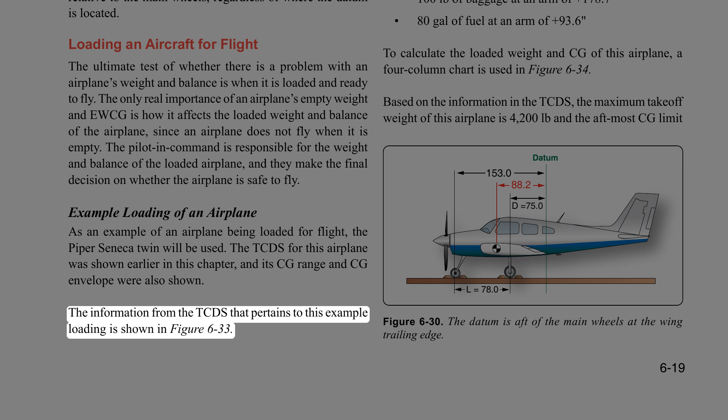Example: loading of an airplane. As an example of an airplane being loaded for flight, the Piper Seneca twin will be used. The TCDS for this airplane was shown earlier in this chapter, and its CG range and CG envelope were also shown. The information from the TCDS that pertains to this example loading is shown in Figure 6-33.

For the example loading of the airplane, the following information applies. Airplane serial number, airplane empty weight, airplane EWCG: 34-7250816, 2,650 pounds, plus 86.8.

For today's flight, the following useful load items are included: 1 pilot at 180 pounds at an arm of plus 85.5; 1 passenger at 160 pounds at an arm of plus 118.1; 1 passenger at 210 pounds at an arm of plus 118.1; 1 passenger at 190 pounds at an arm of plus 118.1; 1 passenger at 205 pounds at an arm of plus 155.7.

50 pounds of baggage at an arm of plus 22.5. 100 pounds of baggage at an arm of plus 178.7. 80 gallons of fuel at an arm of plus 93.6.

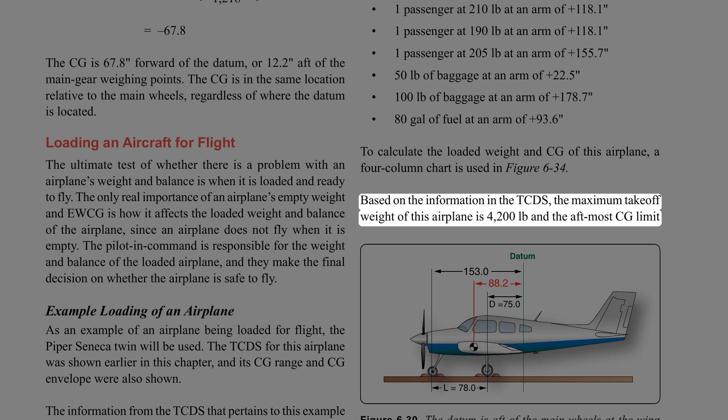To calculate the loaded weight and CG of this airplane, a 4-column chart is used in Figure 6-34. Based on the information in the TCDS, the maximum takeoff weight of this airplane is 4,200 pounds and the aftmost CG limit is plus 94.6.

The loaded airplane in Figure 6-34 is 25 lb too heavy, and the CG is 1.82 too far aft. To make the airplane safe to fly, the load needs to be reduced by 25 pounds and some of the load needs to be shifted forward.

For example, the baggage can be reduced by 25 pounds, and a full 100 pounds of it can be placed in the more forward compartment. 1 passenger can be moved to the forward seat next to the pilot, and the aftmost passenger can then be moved forward. With the changes made, the loaded weight is now at the maximum allowable of 4,200 pounds, and the CG has moved forward 4.42. The airplane is now safe to fly.

Adverse loaded CG checks. Many modern aircraft have multiple rows of seats and often more than one baggage compartment. After any repair or alteration that changes the weight and balance, the A&P mechanic or repairman must ensure that no legal condition of loading can move the CG outside of its allowable limits. To determine this, adverse loaded CG checks must be performed and the results noted in the weight and balance revision sheet.

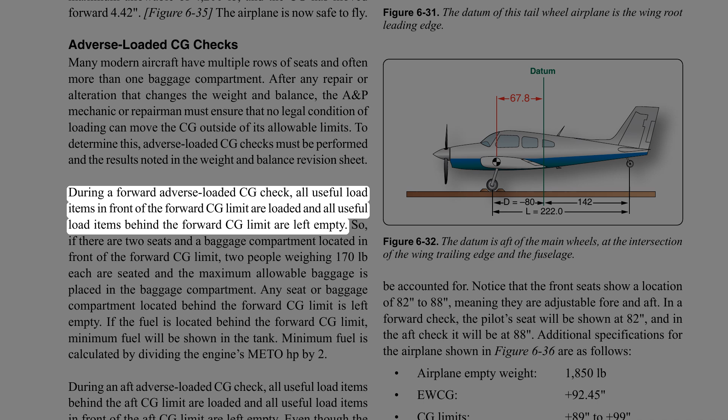During a forward adverse loaded CG check, all useful load items in front of the forward CG limit are loaded, and all useful load items behind the forward CG limit are left empty. So if there are two seats and a baggage compartment located in front of the forward CG limit, two people weighing 170 pounds each are seated and the maximum allowable baggage is placed in the compartment. Any seat or baggage compartment located behind the forward CG limit is left empty.

If the fuel is located behind the forward CG limit, minimum fuel will be shown in the tank. Minimum fuel is calculated by dividing the engine's METO hp by 2.

During an aft adverse loaded CG check, all useful load items behind the aft CG limit are loaded and all useful load items in front of the aft CG limit are left empty. Even though the pilot's seat will be in front of the aft CG limit, the pilot's seat cannot be left empty. If the fuel tank is located forward of the aft CG limit, minimum fuel will be shown.

Example: forward and aft adverse loaded CG checks. Using the stick airplane in Figure 6-36 as an example, adverse forward and aft CG checks are calculated. Some of the data for the airplane is shown in Figure 6-36, such as seat, baggage, and fuel information. The CG limits are shown, with arrows pointing in the direction where maximum and minimum weights are loaded.

On the forward check, any useful load item located in front of 89 inches is loaded, and anything behind that location is left empty. On the aft check, maximum weight is added behind 99, and minimum weight in front of that location. For either check, if fuel is not located in a maximum weight location, minimum fuel must be accounted for. Notice that the front seats show a location of 82 inches to 88 inches, meaning they are adjustable fore and aft.

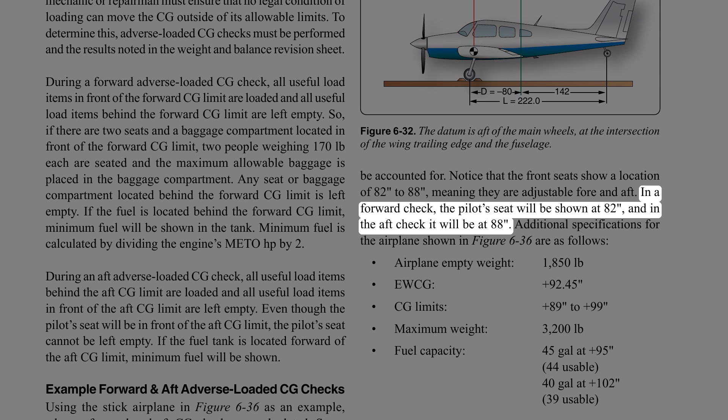In a forward check, the pilot's seat will be shown at 82, and in the aft check it will be at 88.

Additional specifications for the airplane shown in Figure 6-36 are as follows. Airplane empty weight, 1,850 pounds. EWCG, plus 92.45. CG limits, plus 89 inches to plus 99 inches. Maximum weight, 3,200 pounds. Fuel capacity: 45 gallons at plus 95 inches, 44 usable; 40 gallons at plus 102 inches, 39 usable. In evaluating the two extreme condition checks, the following key points should be recognized.

The total arm is the airplane CG and is found by dividing the total moment by the total weight. For the forward check, the only thing loaded behind the forward limit was minimum fuel. The pilot and passenger seats were shown at the forward position of 82. The CG was within limits, so the airplane could be flown this way.

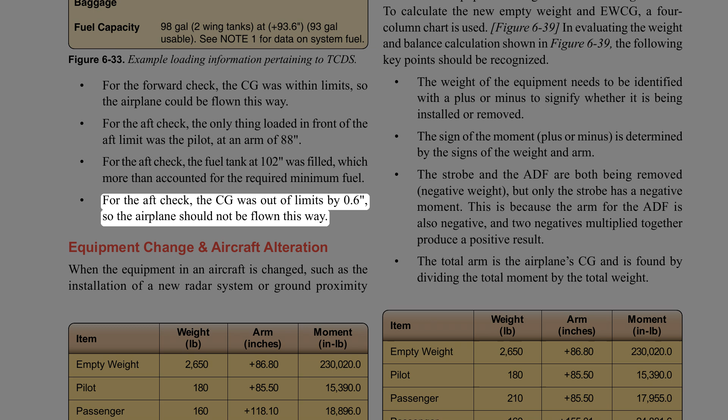For the aft check, the only thing loaded in front of the aft limit was the pilot, at an arm of 88. The fuel tank at 102 inches was filled, which more than accounted for the required minimum fuel. The CG was out of limits by 0.6, so the airplane should not be flown this way.

Equipment change and aircraft alteration. When the equipment in an aircraft is changed, such as the installation of a new radar system or ground proximity warning system, or the removal of a radio or seat, the weight and balance of an aircraft changes. An alteration performed on an aircraft, such as a cargo door being installed or a reinforcing plate being attached to the spar of a wing, also changes the weight and balance of an aircraft.

Anytime the equipment is changed or an alteration is performed, the new empty weight and EWCG must be determined. This can be accomplished by placing the aircraft on scales and weighing it, or by mathematically calculating the new weight and balance. The mathematical calculation is acceptable if the exact weight and arm of all the changes are known.

Example calculation after an equipment change. A small, twin-engine airplane has some new equipment installed and some of its existing equipment removed. The details of the equipment changes are shown in Figure 6-38. To calculate the new empty weight and EWCG, a 4-column chart is used.

In evaluating the weight and balance calculation shown in Figure 6-39, the following key points should be recognized. The weight of the equipment needs to be identified with a plus or minus to signify whether it is being installed or removed.

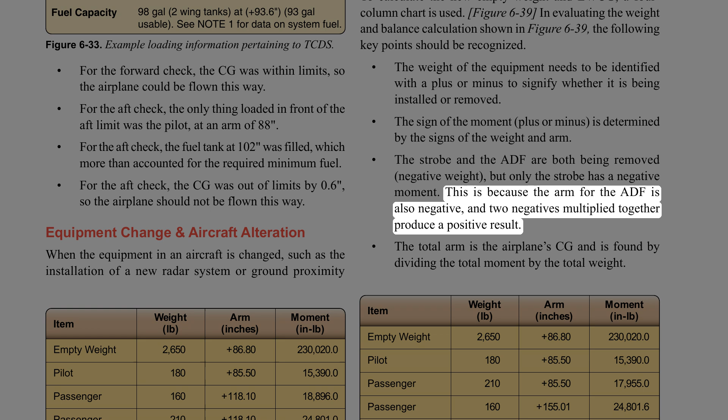The sign of the moment, plus or minus, is determined by the signs of the weight and arm. The strobe and the ADF are both being removed, negative weight, but only the strobe has a negative moment. This is because the arm for the ADF is also negative, and two negatives multiplied together produce a positive result. The total arm is the airplane's CG, found by dividing the total moment by the total weight.

The result of the equipment change is that the airplane's weight was reduced by 22.5 pounds and the CG has moved forward 0.67.

Use of ballast. Ballast is used in an aircraft to attain the desired CG balance, when the CG is not within limits or is not at the location desired by the operator. It is usually located as far aft or as far forward as possible to bring the CG within limits, while using a minimum amount of weight.

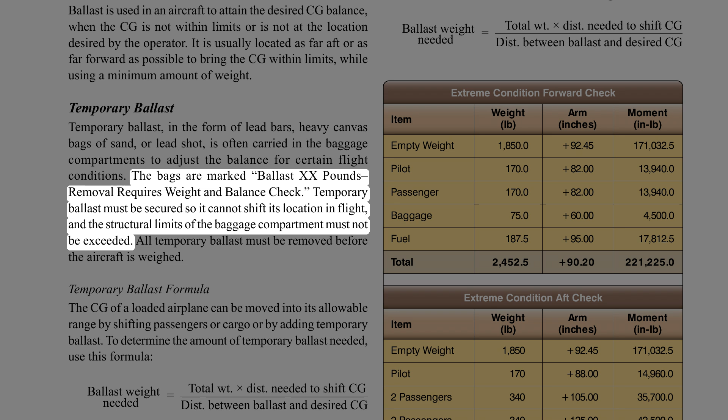Temporary ballast, in the form of lead bars, heavy canvas bags of sand, or lead shot, is often carried in the baggage compartments to adjust the balance for certain flight conditions. The bags are marked, ballast XX pounds. Removal requires a weight and balance check. Temporary ballast must be secured so it cannot shift its location in flight, and the structural limits of the baggage compartment must not be exceeded. All temporary ballast must be removed before the aircraft is weighed.

The CG of a loaded airplane can be moved into its allowable range by shifting passengers or cargo, or by adding temporary ballast. To determine the amount of temporary ballast needed, use this formula.

Figures 6-36 and 6-40 show an aft adverse loaded CG check being performed on an airplane. In this previous example, the airplane's CG was out of limits by 0.6. If there were a need or desire to fly the airplane loaded this way, one way to make it possible would be the installation of temporary ballast in the front of the airplane. The logical choice for placement of this ballast is the forward baggage compartment. The CG for this airplane is 0.6 too far aft.

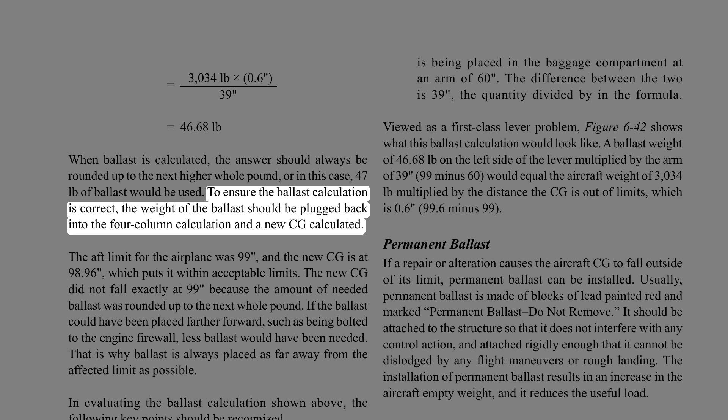If the forward baggage compartment is used as the temporary ballast location, the ballast calculation will be as shown in figure 6-41. When ballast is calculated, the answer should always be rounded up to the next higher whole pound, or in this case, 47 pounds of ballast would be used. To ensure the ballast calculation is correct, the weight of the ballast should be plugged back into the 4-column calculation and a new CG calculated.

The aft limit for the airplane was 99, and the new CG is at 98.96, which puts it within acceptable limits. The new CG did not fall exactly at 99 inches because the amount of needed ballast was rounded up to the next whole pound. If the ballast could have been placed farther forward, such as being bolted to the engine firewall, less ballast would have been needed. That is why ballast is always placed as far away from the affected limit as possible.

In evaluating the ballast calculation shown above, the following key points should be recognized. The loaded weight of the aircraft, as identified in the formula, is what the airplane weighed when the CG was out of limits. The distance the CG is out of limits is the difference between the CG location and the CG limit, in this case 99.6 minus 99.

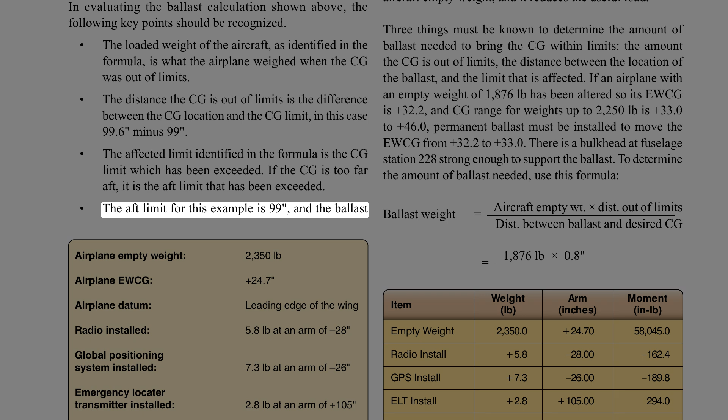The affected limit identified in the formula is the CG limit which has been exceeded. If the CG is too far aft, it is the aft limit that has been exceeded. The aft limit for this example is 99, and the ballast is being placed in the baggage compartment at an arm of 60. The difference between the two is 39 inches, the quantity divided by in the formula.

Viewed as a first-class lever problem, figure 6 to 42 shows what this ballast calculation would look like. A ballast weight of 46.68 pounds on the left side of the lever multiplied by the arm of 39 inches, 99 minus 60, would equal the aircraft weight of 3,034 pounds multiplied by the distance the CG is out of limits, which is 0.6 inches, 99.6 minus 99.

Permanent ballast. If a repair or alteration causes the aircraft CG to fall outside of its limit, permanent ballast can be installed. Usually, permanent ballast is made of blocks of lead painted red and marked 'Permanent ballast, do not remove.' It should be attached to the structure so that it does not interfere with any control action, and attached rigidly enough that it cannot be dislodged by any flight maneuvers or rough landing.

The installation of permanent ballast results in an increase in the aircraft empty weight, and it reduces the useful load. Three things must be known to determine the amount of ballast needed to bring the CG within limits: the amount the CG is out of limits, the distance between the location of the ballast, and the limit that is affected.

If an airplane with an empty weight of 1,876 pounds has been altered so its EWCG is plus 32.2, and the CG range for weights up to 2,250 pounds is plus 33.0 to plus 46.0, permanent ballast must be installed to move the EWCG from plus 32.2 to plus 33.0.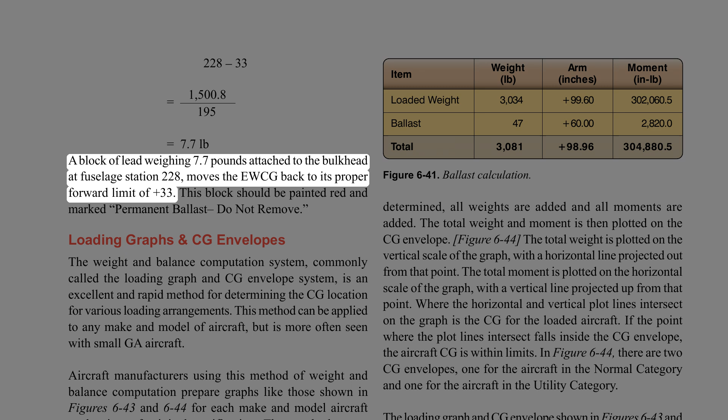There is a bulkhead at fuselage station 228 strong enough to support the ballast. To determine the amount of ballast needed, use this formula. A block of lead weighing 7.7 pounds attached to the bulkhead at fuselage station 228 moves the EWCG back to its proper forward limit of plus 33. This block should be painted red and marked 'Permanent ballast do not remove.'

Loading graphs and CG envelopes. The weight and balance computation system, commonly called the loading graph and CG envelope system, is an excellent and rapid method for determining the CG location for various loading arrangements.

This method can be applied to any make and model of aircraft, but is more often seen with small GA aircraft. Aircraft manufacturers using this method of weight and balance computation prepare graphs like those shown in figures 6-43 and 6-44 for each make and model aircraft at the time of original certification. The graphs become a permanent part of the aircraft records and are typically found in the AFM/POH.

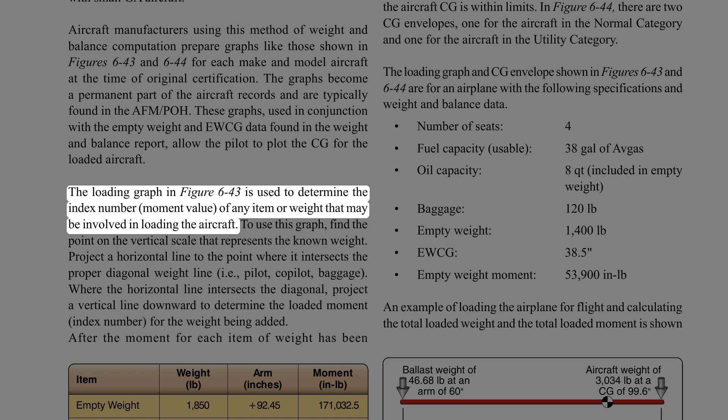These graphs, used in conjunction with the empty weight and EWCG data found in the weight and balance report, allow the pilot to plot the CG for the loaded aircraft. The loading graph in figure 6-43 is used to determine the index number, moment value, of any item or weight that may be involved in loading the aircraft.

To use this graph, find the point on the vertical scale that represents the known weight. Project a horizontal line to the point where it intersects the proper diagonal weight line, i.e., pilot, co-pilot, baggage. Where the horizontal line intersects the diagonal, project a vertical line downward to determine the loaded moment, index number, for the weight being added. After the moment for each item of weight has been determined, all weights are added.

All moments are added. The total weight and moment is then plotted on the CG envelope. The total weight is plotted on the vertical scale of the graph, with a horizontal line projected out from that point. The total moment is plotted on the horizontal scale of the graph, with a vertical line projected up from that point. Where the horizontal and vertical plot lines intersect on the graph is the CG for the loaded aircraft.

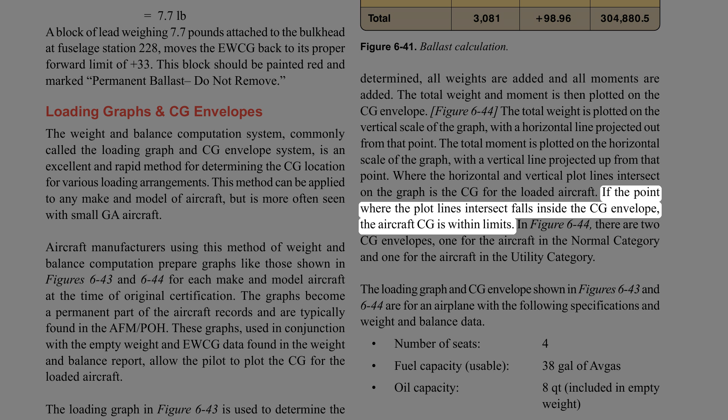If the point where the plot lines intersect falls inside the CG envelope, the aircraft CG is within limits. In Figure 6-44, there are two CG envelopes, one for the aircraft in the normal category and one for the aircraft in the utility category.

The loading graph and CG envelope shown in Figures 6-43 and 6-44 are for an airplane with the following specifications and weight and balance data. Number of seats, 4. Fuel capacity, usable, 38 gallons of avgas. Oil capacity, 8 quarts, included in empty weight. Baggage, 120 pounds. Empty weight, 1,400 pounds. EWCG, 38.5. Empty weight moment, 53,900 in-lb.

An example of loading the airplane for flight and calculating the total loaded weight and the total loaded moment is shown in Figures 6-45 and 6-46. The use of the loading graph to determine the moment for each of the useful load items is shown in Figure 6-46. The color used for each useful load item in Figure 6-45 matches the color used for the plot on the loading graph.

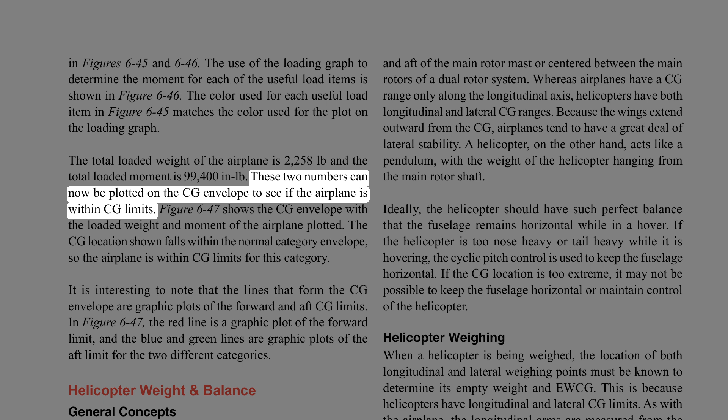The total loaded weight of the airplane is 2,258 pounds and the total loaded moment is 99,400 in-lb. These two numbers can now be plotted on the CG envelope to see if the airplane is within CG limits. Figure 6-47 shows the CG envelope with the loaded weight and moment of the airplane plotted. The CG location shown falls within the normal category envelope, so the airplane is within CG limits for this category. It is interesting to note that the lines that form the CG envelope are graphic plots of the forward and aft CG limits.

In Figure 6-47, the red line is a graphic plot of the forward limit, and the blue and green lines are graphic plots of the aft limit for the two different categories.

Helicopter weight and balance, general concepts. All the terminology and concepts that apply to airplane weight and balance also apply generally to helicopter weight and balance. However, there are some specific differences that need to be identified.

Most helicopters have a much more restricted CG range than airplanes. In some cases, this range is less than 3 inches. The exact location and length of the CG range is specified for each helicopter and usually extends a short distance fore and aft of the main rotor mast, or is centered between the main rotors of a dual rotor system.

Whereas airplanes have a CG range only along the longitudinal axis, helicopters have both longitudinal and lateral CG ranges. Because the wings extend outward from the CG, airplanes tend to have a great deal of lateral stability. A helicopter, on the other hand, acts like a pendulum, with the weight of the helicopter hanging from the main rotor shaft.

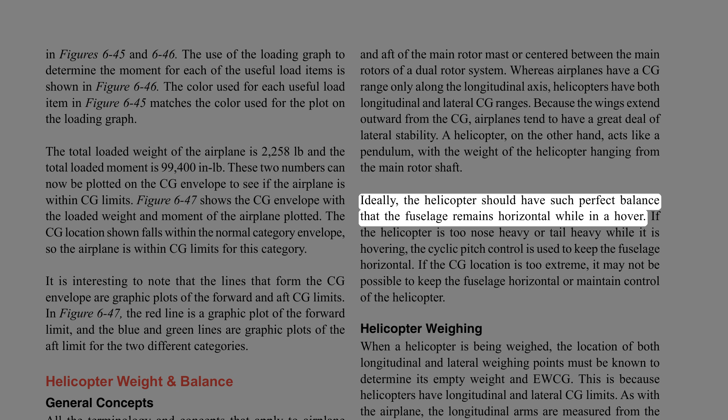Ideally, the helicopter should have such perfect balance that the fuselage remains horizontal while in a hover. If the helicopter is too nose-heavy or tail-heavy while hovering, the cyclic pitch control is used to keep the fuselage horizontal. If the CG location is too extreme, it may not be possible to keep the fuselage horizontal or maintain control of the helicopter.

Helicopter weighing. When a helicopter is being weighed, the location of both longitudinal and lateral weighing points must be known to determine its empty weight and EWCG. This is because helicopters have longitudinal and lateral CG limits.

As with the airplane, the longitudinal arms are measured from the datum, with locations behind the datum being positive arms and locations in front of the datum being negative arms. Laterally, the arms are measured from the butt line, which is a line from the nose to the tail running through the middle of the helicopter. When facing forward, arms to the right of the butt line are positive, to the left they are negative.

Before a helicopter is weighed, it must be leveled longitudinally and laterally. This can be done with a spirit level, but often it is done with a plumb bob. For example, the Bell JetRanger has a location inside the aft cabin where a plumb can be attached and allowed to hang down to the cabin floor.

On the cabin floor is a plate bearing crosshairs that correspond to the horizontal and lateral axis of the helicopter. When the point of the plumb bob falls in the middle of the crosshairs, the helicopter is level along both axes. If the tip falls forward of this point, the nose of the helicopter is too low. If it falls to the left, the left side is too low. In other words, the tip of the plumb bob always moves toward the low point.

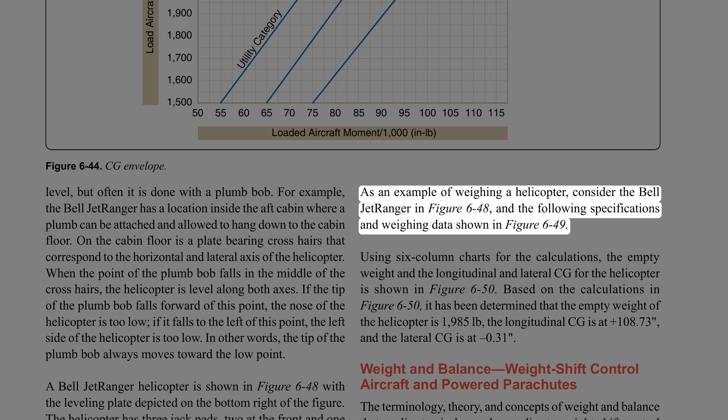As an example of weighing a helicopter, consider the Bell JetRanger in Figure 6-48, and the following specifications and weighing data shown in Figure 6-49. Using 6-column charts for the calculations, the empty weight and the longitudinal and lateral CG for the helicopter is shown in Figure 6-50.

Based on the calculations in Figure 6-50, it has been determined that the empty weight of the helicopter is 1,985 pounds, the longitudinal CG is at plus 108.73, and the lateral CG is at minus 0.31.

Weight and balance, weight shift control aircraft and powered parachutes. The terminology, theory, and concepts of weight and balance that applies to airplanes also applies to weight shift control aircraft and powered parachutes. Weight is still weight, and the balance point is still the balance point. However, there are a few differences that need to be discussed.

Before reading about the specifics of weight and balance on weight shift control aircraft and powered parachutes, be sure to read about their aerodynamic characteristics in Chapter 5, Physics.

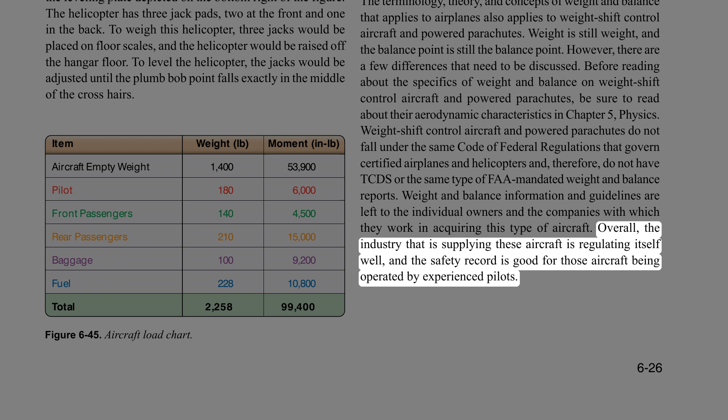Weight shift control aircraft and powered parachutes do not fall under the same code of federal regulations that govern certified airplanes and helicopters, and therefore do not have TCDS or the same FAA-mandated weight and balance reports. Weight and balance guidelines are left to individual owners and the companies they work with in acquiring this type of aircraft. Overall, the industry supplying these aircraft is regulating itself well, and the safety record is good for aircraft operated by experienced pilots.

Weight shift control aircraft, commonly known as trikes, have very few options for loading because they have very few places to put useful load items. Some trikes have only one seat and a fuel tank, so the only variables for a flight are the amount of fuel and the weight of the pilot. Some trikes have two seats and a small storage bin in addition to the fuel tank.

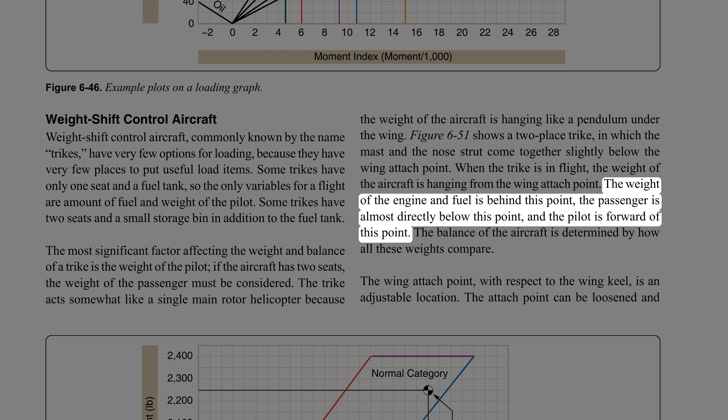The most significant factor affecting the weight and balance of a trike is the weight of the pilot. If the aircraft has two seats, the weight of the passenger must also be considered. The trike acts somewhat like a single main rotor helicopter because the weight of the aircraft hangs like a pendulum under the wing. Figure 6-51 shows a two-place trike in which the mast and the nose strut come together slightly below the wing attach point. When the trike is in flight, the weight of the aircraft hangs from the wing attach point. The weight of the engine and fuel is behind this point, the passenger is almost directly below it, and the pilot is forward of it. The balance of the aircraft is determined by how all these weights compare.

The wing attach point, with respect to the wing keel, is an adjustable location. It can be loosened and moved slightly forward or aft, depending on the weight of the occupants. For example, if the aircraft is flown by a heavier person, the attach point can be moved farther aft, bringing the wing forward, to compensate for the change in CG. Figure 6-52 shows a close-up of the wing attach point and the small amount of forward and aft movement available.

Powered parachutes have many of the same characteristics as weight shift aircraft when it comes to weight and balance. They have the same limited loading, with only one or two seats and a fuel tank. They also act like a pendulum, with the weight of the aircraft hanging beneath the inflated wing parachute. The point at which the inflated wing attaches to the aircraft structure is adjustable to compensate for pilots and passengers of varying weights. With a very heavy pilot, the wing attach point would be moved forward to prevent the aircraft from being too nose-heavy. Figure 6-53 shows the structure of a powered parachute with adjustable wing attach points.

Weight and balance for large airplanes is almost identical to that for small airplanes, just on a much larger scale. If a technician can weigh a small airplane and calculate its empty weight and EWCG, that same technician should be able to do it for a large airplane. The jacks and scales are larger, and it may take more personnel to handle the equipment, but the concepts and processes are the same.

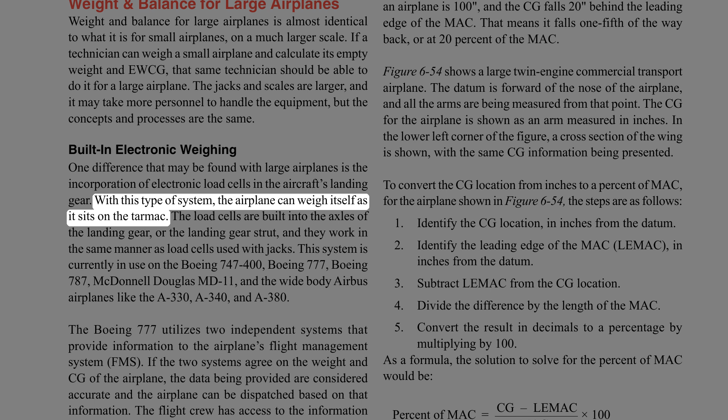One difference found with large airplanes is the incorporation of electronic load cells in the aircraft's landing gear. With this system, the airplane can weigh itself as it sits on the tarmac. The load cells are built into the axles of the landing gear or the landing gear strut, and work the same way as load cells used with jacks. This system is currently in use on the Boeing 747-400, Boeing 777, Boeing 787, McDonnell Douglas MD-11, and wide-body Airbus airplanes like the A330, A340, and A380.

The Boeing 777 utilizes two independent systems that provide information to the airplane's Flight Management System, or FMS. If the two systems agree on the weight and CG of the airplane, the data is considered accurate and the airplane can be dispatched based on that information. The flight crew has access to this information on the flight deck by accessing the FMS and bringing up the weight and balance page.

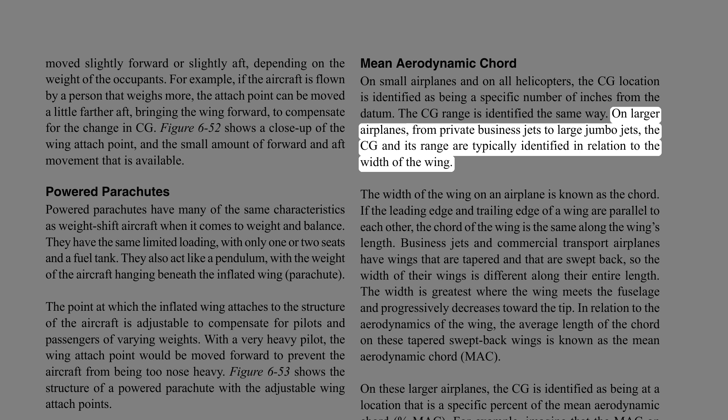On small airplanes and on all helicopters, the CG location is identified as a specific number of inches from the datum, and the CG range is identified the same way. On larger airplanes, from private business jets to large jumbo jets, the CG and its range are typically identified in relation to the width of the wing, known as the mean aerodynamic chord.

The width of the wing on an airplane is known as the chord. If the leading edge and trailing edge of a wing are parallel to each other, the chord of the wing is the same along the wing's length.

Business jets and commercial transport airplanes have wings that are tapered and swept back, so the width of their wings is different along their entire length. The width is greatest where the wing meets the fuselage and progressively decreases toward the tip.

In relation to the aerodynamics of the wing, the average length of the chord on these tapered swept-back wings is known as the mean aerodynamic chord, MAC. On these larger airplanes, the CG is identified as being at a location that is a specific percent of the mean aerodynamic chord, percent MAC.

For example, imagine that the MAC on an airplane is 100, and the CG falls 20 inches behind the leading edge of the MAC. That means it falls 1/5 of the way back, or at 20% of the MAC.

Figure 6-54 shows a large twin-engine commercial transport airplane. The datum is forward of the nose of the airplane, and all the arms are being measured from that point. The CG for the airplane is shown as an arm measured in inches. In the lower left corner of the figure, a cross-section of the wing is shown, with the same CG information being presented.

To convert the CG location from inches to a percent of MAC, for the airplane shown in figure 6-54, the steps are as follows. Identify the CG location, in inches from the datum. Identify the leading edge of the MAC, in inches from the datum.

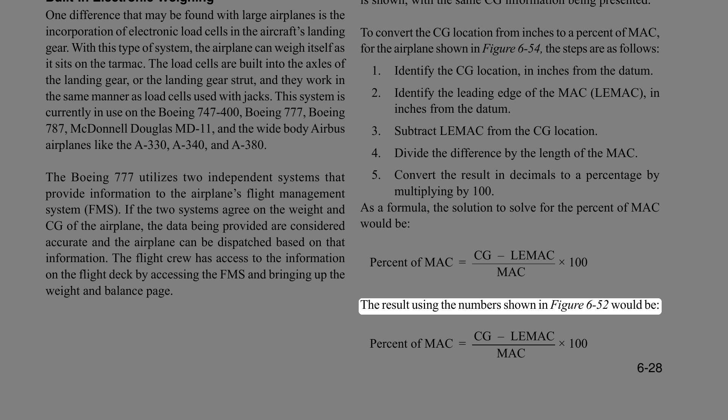Subtract LEMAC from the CG location. Divide the difference by the length of the MAC. Convert the result in decimals to a percentage by multiplying by 100. As a formula, the solution to solve for the percent of MAC would be. The result using the numbers shown in figure 6-52 would be.

If the CG is known in percent of MAC, and there is a need to know the CG location in inches from the datum, the conversion would be done as follows.

Convert the percent of MAC to a decimal by dividing by 100. Multiply the decimal by the length of the MAC. Add this number to LEMAC.

As a formula, the solution to convert a percent of MAC to an inch value would be: CG in inches equals percent MAC divided by 100, times MAC, plus LEMAC.

For the airplane in figure 6-54, if the CG was at 32.5% of the MAC, the solution would be: CG in inches equals percent MAC divided by 100 times MAC plus LEMAC, equals 32.5 divided by 100 times 180 plus 900, equals 958.5.

Weight and balance records. When a technician gets involved with the weight and balance of an aircraft, it almost always involves a calculation of the aircraft's empty weight and EWCG.

Only on rare occasions are technicians involved in calculating adverse loading CG checks, how much ballast is needed, or the loaded weight and balance of the aircraft.

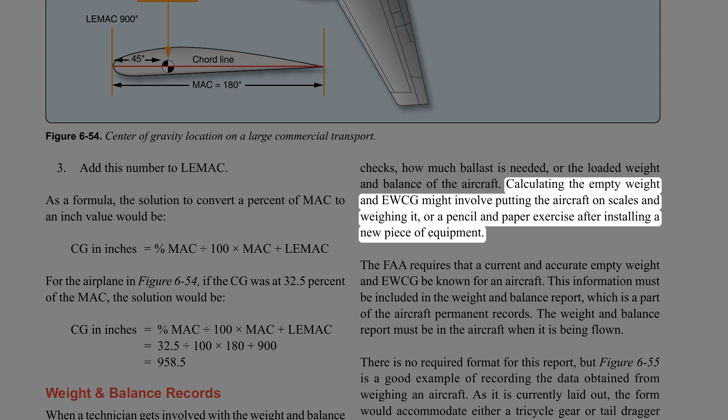Calculating the empty weight and EWCG might involve putting the aircraft on scales and weighing it, or a pencil and paper exercise after installing a new piece of equipment.

The FAA requires that a current and accurate empty weight and EWCG be known for an aircraft. This information must be included in the weight and balance report, which is a part of the aircraft permanent records. The weight and balance report must be in the aircraft when it is being flown.

There is no required format for this report, but figure 6-55 is a good example of recording the data obtained from weighing an aircraft. As it is currently laid out, the form would accommodate either a tricycle gear or tail dragger airplane. Depending on the gear type, either the nose or the tail row would be used.

If an airplane is being weighed using jacks and load cells, or if a helicopter is being weighed, the figure 6-55 aircraft weight and balance report item names must be changed to reflect the weight locations.

If an equipment change is being done on an aircraft, and the new weight and balance is calculated mathematically instead of weighing the aircraft, the same type of form shown in figure 6-55 can be used. The only change would be the use of a 4-column solution, instead of 6 columns, and there would be no tare weight or involvement with fuel and oil.